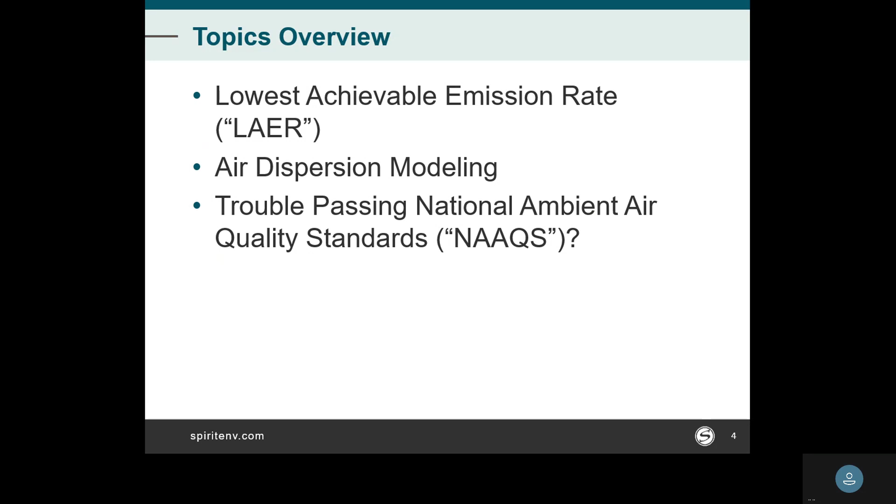I don't know if you've heard about it, but the EPA is actually right now doing what they call reconsiderations of the NAAQS. They're reevaluating the PM NAAQS, primarily PM 2.5, and they're reevaluating the ozone NAAQS. Both of those levels may drop sometime in the future. Matter of fact, the PM probably will drop -- it's just a matter of how much. So passing NAAQS can be a very important and critical item.

So the purpose for today -- this is an intermediate level course, and we're going to presume that you have kind of a base working knowledge of what some of the concepts and terms are. We may go into some of them again, just as a reminder. I don't know how often some of y'all in the audience work in this world.

Michelle and myself, we pretty much live in it full time. But what we do -- the way I used to describe it, and the way I still describe it to some of our new engineers and younger ones at Spirit -- is that what we do is a perishable asset. And you've probably found that out yourselves in your career. If you're working with something and you step away from it for a few months and try to get back into it, something has probably changed.

What we're going to try to do is help reinforce some of those concepts, bring you up to date on where things are, and maybe even add some new concepts you may not have run into in the past. Ultimately, our goal with the class here today is to provide a better understanding of air permitting and how some of this stuff works. Okay, sound good?

All right, so let's go into modified versus affected. This is one of the first things somebody has to determine when looking at a project, or when somebody says, hey, I want to do something to a permit or a piece of equipment out there. Are we modifying it or are we affecting it? It does make a difference in how regulatory agencies receive the project and carries the conversation when you're moving forward.

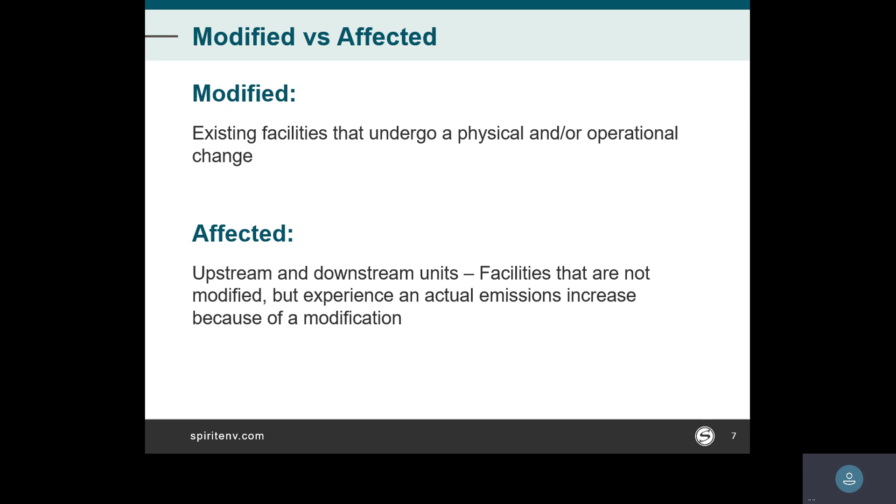Modified is for existing facilities that undergo a physical or operational change. Now, a new piece of equipment is a new piece of equipment, right? But when you've got something out there that's existing, when do you modify it, and what is a modification? Likewise, affected is an upstream or downstream unit that is not modified, but has an actual increase in emissions because of something that happened somewhere else. We're going to go into both of these categories in more detail.

So let's start with modifications, physical and operational changes first. A physical change is the actual construction of a facility or something physical to an existing facility. The way I describe it is you're actually putting your hands on a piece of equipment. You're doing something. You're actually physically changing part of the structure or part of how it was originally built.

The EPA, when they came up with this definition for federal major NSR rules, the definition according to the EPA and many state programs could potentially include renovation work that extends the life of the facility or the life of the project. It's borne out in a number of things. If you think about NSPS and NESHAPs, they have levels in there where if you do changes to a piece of equipment that exceed a certain cost, they're going to treat that piece of equipment either as a new piece of equipment, or it will now become subject to the rule where it may not have been before.

You'll also see it parallel into state environmental agencies. For example, at the TCEQ, a lot of people don't know this, but if you're coming in with a piece of equipment and I'm going to use the word modifying, I know it's a kind of dangerous term, but if you're doing something to it to the point where you exceed 50% of its replacement value, the TCEQ is going to consider you to be building a new one. That's just because you've restructured what was there so much that it's like building a new piece of equipment. The EPA and many state programs actually take that into account, or they try to.

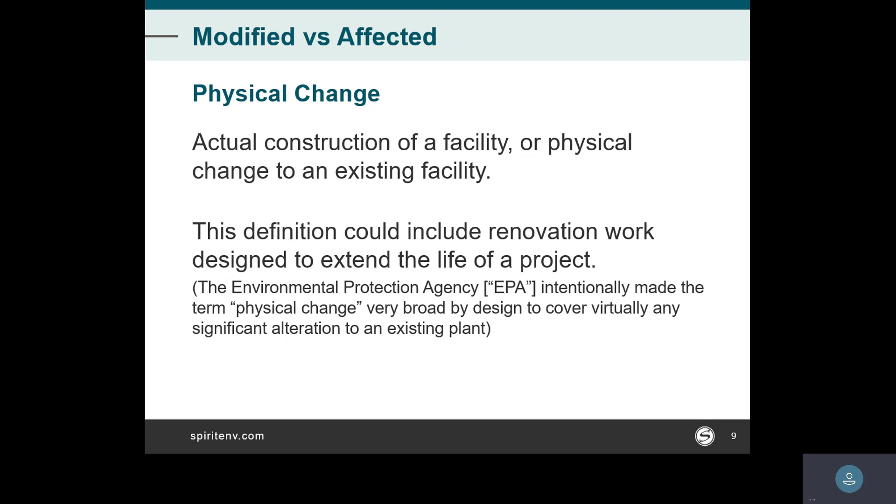So operational change is where it starts to get more interesting, I think, is what does that really mean? When the EPA came up with the concept of operational change for major NSR, PSD, and non-attainment, they intentionally made that concept very broad because I think they were trying to encompass as many things as they possibly could and pull them into the permitting program.

So it is a broadly used term, and it's really designed where you change the method of operation of an existing piece of equipment versus how it was originally represented or authorized. That's a pretty big difference: okay, you've got a piece of equipment. What did we originally tell the regulatory agency, whether it be the TCEQ or whatever state you're in or the EPA, what did we tell them we were going to build? What kind of parameters did we put on that?

And then if you want to do an operational change that goes outside of that box, the EPA is going to consider that a modification, even though you haven't physically touched or laid hands on the piece of equipment. Part of the reason is that a lot of those other restrictions that go into a permit go into other things besides just the pure authorization and the technicals of what you're trying to do. It also goes into public protectiveness.

If you have to do modeling, that goes into it—modeling for NAAQS compliance. And many states, including Texas, have an air toxics program. So all of these things cascade and build on each other.

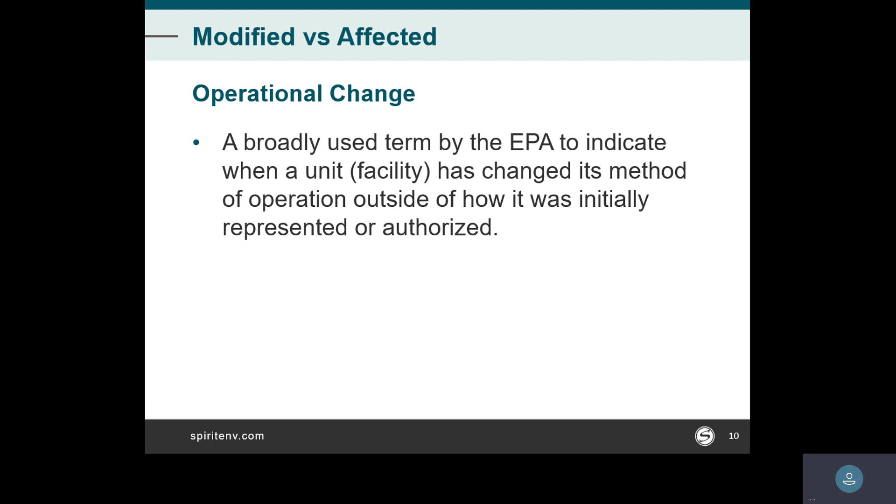Going back and figuring out whether we're doing an operational change to a piece of equipment can be very important. I've seen a lot of crazy conversations occur on whether something was modified or not, and a lot of times it gets back to operational change.

An operational change can encompass a number of different things. It can result in an actual emissions increase, or a change in character of emissions.

For example, if you're changing materials in a storage tank—going from product A to product B—and the tank was never authorized for product B, even though you don't need to physically change the tank, that would be an operational change and therefore a modification. That gets back into control technology, vapor pressure, and molecular weight of the new material you're putting in.

Ultimately, the agencies exist to protect the public. So they'll also potentially look at an NAAQS type analysis and off-property impacts for health effects.

Another thing is that when you make representations, a lot of them involve things like firing rates, charge rates, and throughput limits. All of those become conditions around which an air permit is issued. So if you exceed any of those representations, that's also considered an operational change, which would be a modification, because you're doing something different than the equipment was ever identified or authorized to do.

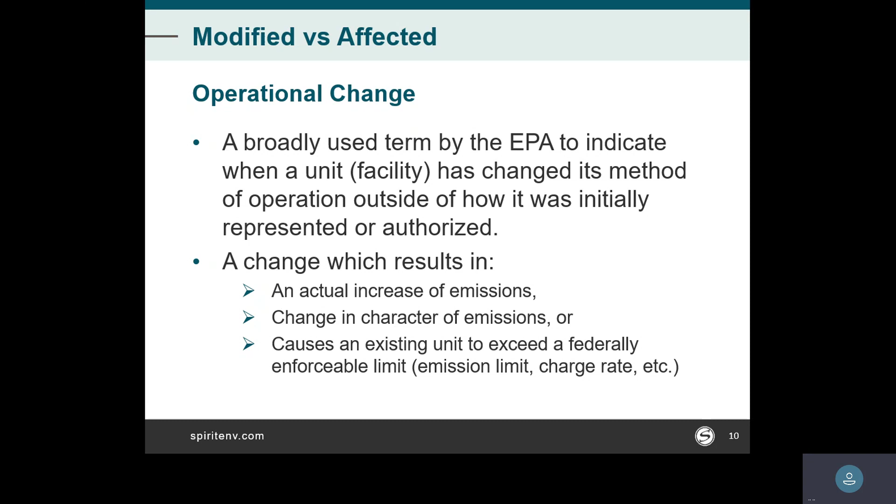Operational change encompasses so much that the EPA actually decided to take the reverse course and tell you what an operational change is not. How about that? It's easier to say what it isn't instead of what it is.

Some of these rule citations I have for you here are out of the EPA rules. You'll see two different cites: 51-165, 51-166, which I have here, and 52-21. For those that don't totally nerd out on environmental regulations, there is a difference, and it's in the fine tuning of the rules. 51-166 is the EPA's PSD rule.

That applies to states, what are called SIP-approved states. A SIP-approved state has full authority to carry out the environmental program for the EPA. Those are the states that actually issue the permits under their own stead, and the EPA is basically a third-party observer.

52-21 is a very similar rule, but it's for what they call delegated states. A delegated state does most of the work, but it's actually the EPA that's issuing the permit or approving the actions. So it's about whose authority the activity is occurring under—that's the difference between an approved state and a delegated state.

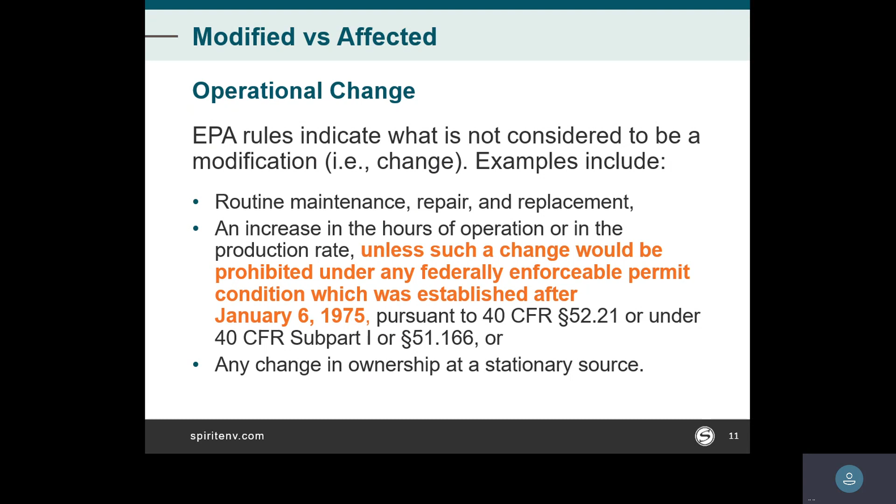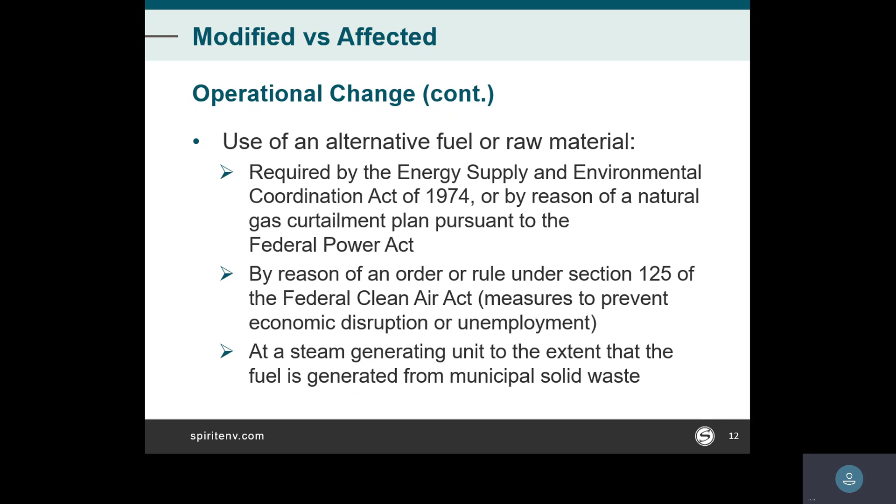I've got some other things in here that I put in just to be inclusive in the slide deck. But most of these other exemptions from the definition of modification actually go back to the late 70s and early 80s. Back then there was a big embargo on the United States for fuels and petroleum fuels, and the EPA and federal government reacted to that. There was a time you couldn't get natural gas to fire gas plants, or couldn't find the kind of fuel oil you needed. There were fuel shortages all over the place, and the federal government recognized that. So that's why you'll see things like a natural gas curtailment plan, to prevent disruption to the American economic system and to the making of fuels and gases that we all use. That's what a lot of these other exemptions were for, so like I said, I put those in there just to be inclusive.

Changes that require authorization: if you have a production increase that requires a physical change, that's a modification. We already talked a little about operational change, and I've got some more examples here. If you exceed a federally enforceable emission limit, basically a permit condition or representation you made in a permit, things like emission rates, firing rates, throughput limitations, charge rates, those all become conditions and requirements around which an air permit was issued. So if you go outside of that box of what you represented, that's an operational change and therefore a modification.

I can't tell you how many times over my career, both with the regulatory agency and now at Spirit, the question comes up: well, we're not doing that much, we represented a 100 ppm exit concentration and we're only going up to 125, what's the big deal? Well, the big deal is you told everybody it was going to be 100, and once you go above and beyond that, that's an operational change by definition. So it's those kinds of concepts that sometimes get embroiled on your desk when you're going back and asking, have I modified something or not?

So just a helpful hint: is it different than what you originally said it was going to be? That's huge in the environmental world. The EPA actually has a slang term for that - they call it a relaxation of a federal requirement, a federally enforceable requirement. That's the way they look at it.

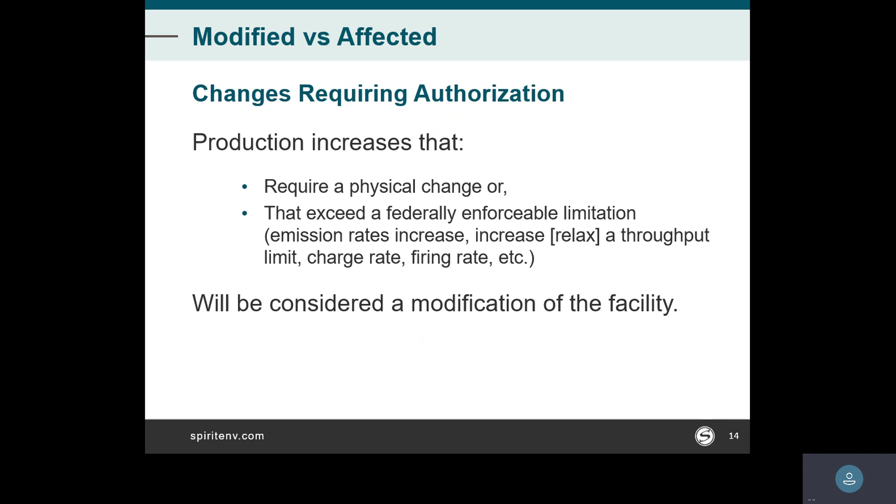The maximum allowable emission rate table - almost always, if you have a change that causes you to exceed that, either a pound an hour or a ton per year, it's going to be considered a modification. Almost always. There is an exception, and it's going to be an unfair one, but we've seen it a lot: the EPA gives themselves a lot of deference and treats themselves differently than everybody else sometimes. If you haven't encountered that yet in your career, you probably will eventually.

An example of that happened just a couple of years ago: if the EPA changes a calculation methodology - AP42 storage tank calculations is a big one, they had a total revamp of AP42 a while back - and you go back and look at those new calculations, depending on the physical requirements and materials you're using, sometimes you'll calculate an emissions increase, sometimes a decrease. It's kind of a mixed bag. But if you have something with an emissions increase that causes you to increase emissions on the maximum allowable table, if it's because the EPA changed a factor, they won't necessarily call that a modification.

Now, they may go back and make you remodel to prove that the higher emission rate isn't going to impact somebody off property. So there may be a modeling component to it, but they won't make you go through a full BACT analysis because it came from them. Now what happens if you go back and decide you were off on a factor and need to modify it, and your pounds an hour, your tons a year go up a little differently? If you talk to the EPA and many state programs, if you've increased the pounds an hour on the allowable table, that's a modification all day long. They give themselves deference—they can change their factors, but the other side necessarily can't.

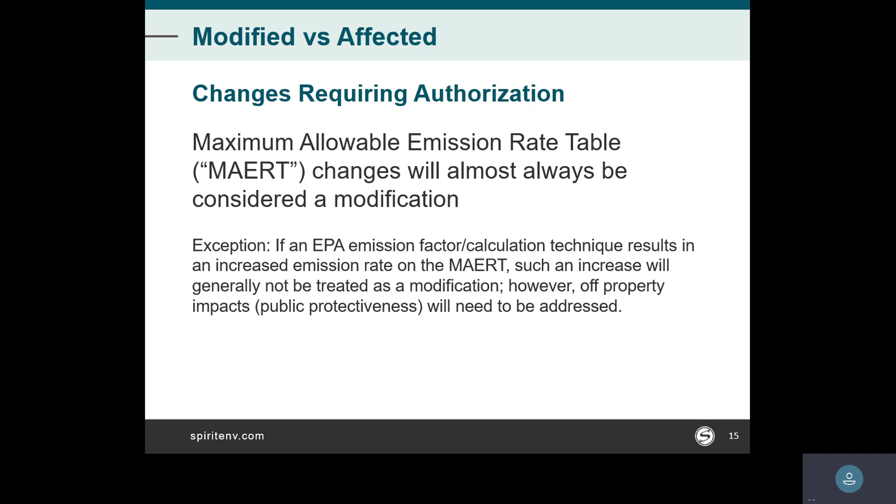Okay, any questions on modification so far? Tracking pretty much with what you've done and what you've heard? Good.

The other category is affected. Sometimes in my career I've noticed people will say modified and affected and cross those terms a lot—'we affected it.' Well, did you modify it? 'Well, it's affected.' Well, what does that mean? Because if you're an environmental person, modification means something different to you than affected does. So sometimes it's just having that conversation that gets kind of interesting.

An affected facility is terminology that the EPA uses—it's primarily an EPA-derived term and concept. Some states may or may not look at affected facilities, depending on what's going on specifically. But basically, an affected unit is an unmodified unit that has an increase in actual emissions because of something happening someplace else. So you haven't modified it, you haven't done a physical change, you're not changing the way it operates. But because of something that happens someplace else, that particular piece of equipment is going to see an emissions increase. That's what they mean by affected units.

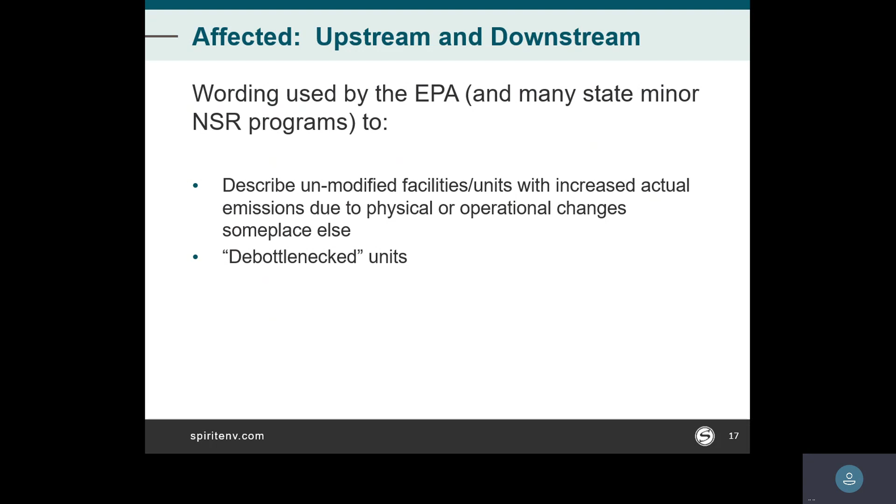The EPA also has a slang term for that—there's a lot of slang words and acronyms in our business, right? They call it 'debottlenecked'—the facility was debottlenecked. So if you heard that, it doesn't necessarily mean it was modified. It could be—sometimes the debottlenecked unit is the unit you're modifying to relax something. But a lot of times it's not. We've got some examples a little later to help point that out.

Debottlenecking is basically removing a constraint somewhere in the system that keeps it from operating up to what you originally thought it would operate, how it was supposed to operate. A lot of you know that when you design and build a piece of equipment, it would be nice if once you actually put it on the ground it could do what it was advertised to do, right? How many of you have run into that before?

A lot of times you think something is going to operate at 1,000 gallons a minute or what have you. You get the equipment out there and now it's actually doing 900 or 870. Well, if you do a change to increase it up to that 1,000, believe it or not, that's considered a modification, especially if you got the equipment built and it's already on the ground, because now you've done a physical change to it. And if that piece of equipment now can send more to intermediate processing, more to storage tanks that those vessels have never seen before, that increase in emissions is the affected piece, because the environment is actually seeing an emissions increase.

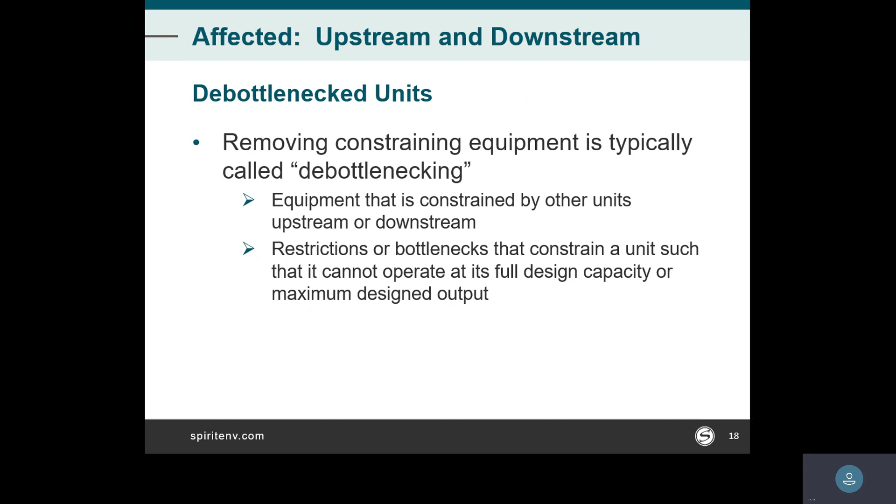So, kind of a summary of what we were just talking about: sources upstream and downstream that primarily experience an actual increase in emissions are considered to be debottlenecked and affected.

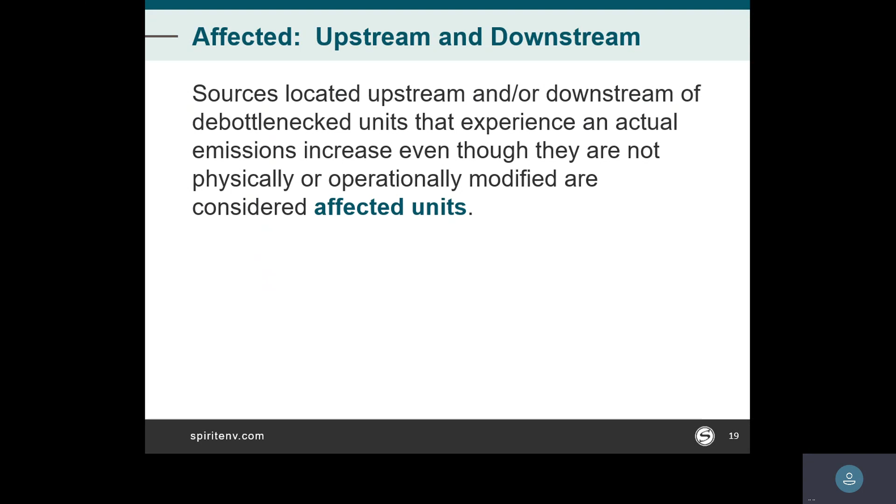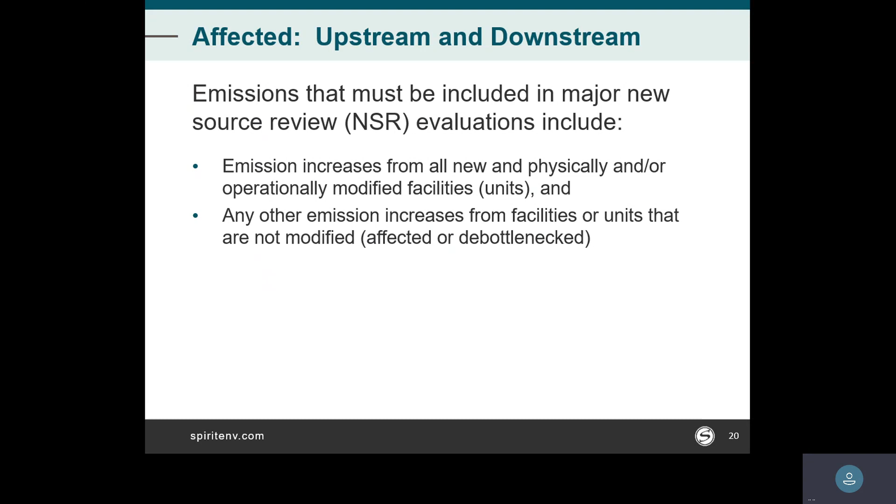Here's why that's important. When you do a major NSR review, meaning prevention of significant deterioration, what a lot of people call PSD, or non-attainment review, you're figuring out if a project triggers netting, and then if the net is significant, you're looking at two categories of emissions. They're looking at modified facilities that have an increase - we already talked about that, physical and operational changes. But it also picks up affected emission increases - even though the piece of equipment was not specifically modified, the atmosphere is going to see an actual increase in emissions because of something that happened somewhere else.

So those have to be picked up in major NSR analysis as well. Now, the EPA, rightly or wrongly, they're going to go conservative. They're going to presume that the affected emissions increase is a direct result of that project that happened someplace else, and that those emissions increases need to be captured somehow.

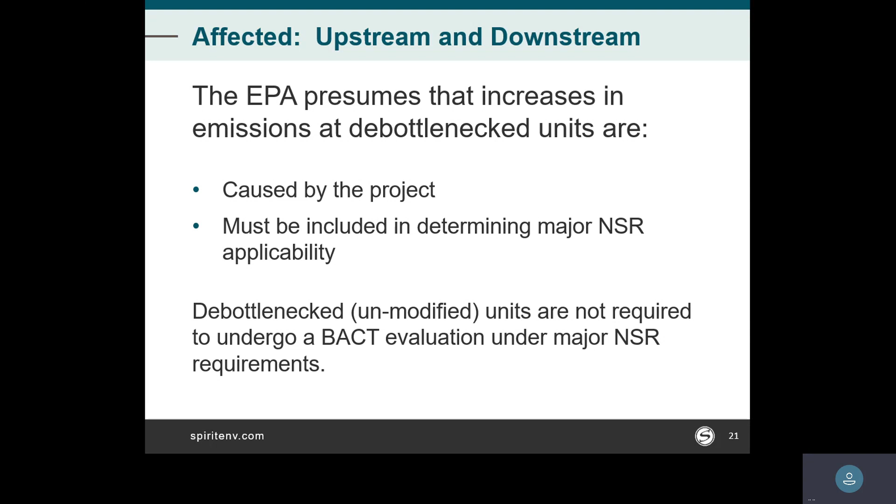That goes into determining whether you trigger PSD or non-attainment or not. Now, keep in mind that a debottlenecked unit is not modified. So the difference between those two categories: if you modify something, a physical or operational change, it has to go through BACT - the entire review process of how it works. An affected unit does not. It's not modified, so it doesn't legally and technically trigger the requirement that it has to go through a BACT review. But those emissions increases do need to get captured and included in the major NSR applicability. And then if there's any modeling, those emissions increases also need to be included in the modeling analysis. So it's kind of part of the way there - it doesn't need BACT, but all the other criteria still generally apply to an affected piece of equipment.

So modified units always undergo BACT, even if it's the unit you're debottlenecking. We've actually had people come in and say, well, the federal rules say that if I'm affecting something or debottlenecking it, I don't need to have BACT. It's like, well, that's true - unless you're physically modifying the piece of unit that's constraining it, which gets you right back into the BACT loop again. That actually comes up from time to time.

So not only do the emissions increases from affected units need to be included in modeling and in applicability, don't forget there's also the air quality analysis, which may or may not be modeling. States have different ways they can approach that, but it's a public protectiveness analysis - are you protecting the NAAQS, is what a lot of that comes back to. And also, if you're in a state that has increment and you have to do an increment analysis, affected facilities and the emission rates also need to get picked up and put into any increment calculations as well.

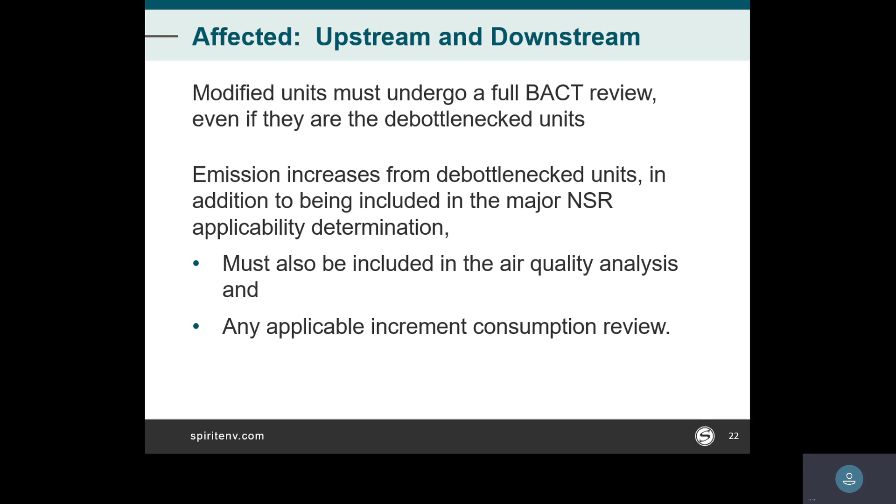Here's the other thing about affected units that makes it confusing: they're treated almost identical to modified units. The way you do an emission increase calculation for an affected unit is the same way you would for a modified unit. It's the baseline actual emission rate for that piece of equipment before the change that debottlenecked it, versus either a projected actual emission rate or a potential to emit after the change. That's how they get that delta, that's how they figure out if that increase has happened or not. And that's the delta that gets put into major applicability and potentially into any health effects or modeling type scenario that would come up after that.

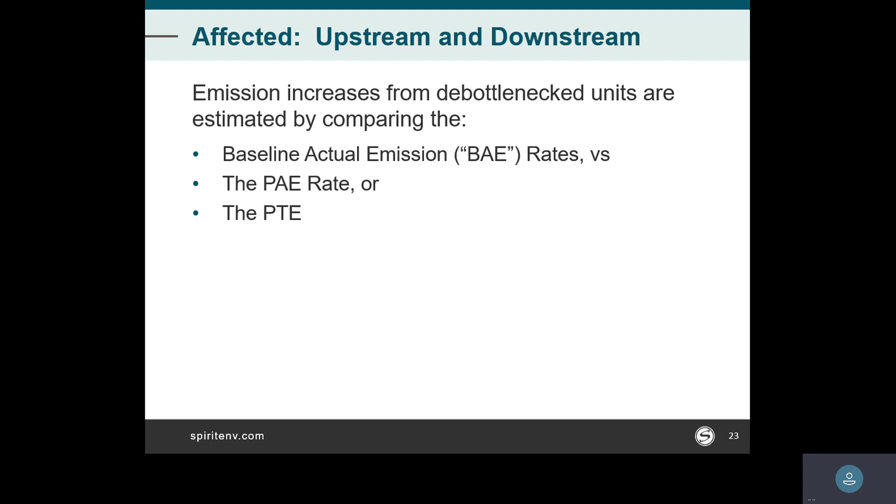All right, clear as mud? Any questions? Doing okay so far? I'm either really doing a good job explaining this or it's still early. I'm going to go with option number two - it's still early.

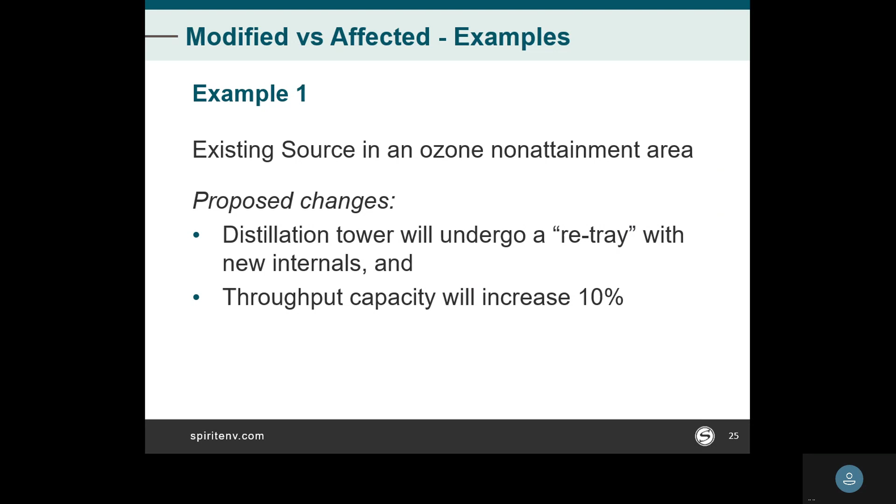All right, modified versus affected examples. In an ozone non-attainment area, a company comes in, they have a distillation tower and they're going to retray it with new internals, and the throughput capacity is going to increase 10%. Is that a modification? Yeah, because you actually made a physical change, so that automatically puts it into the modification category.

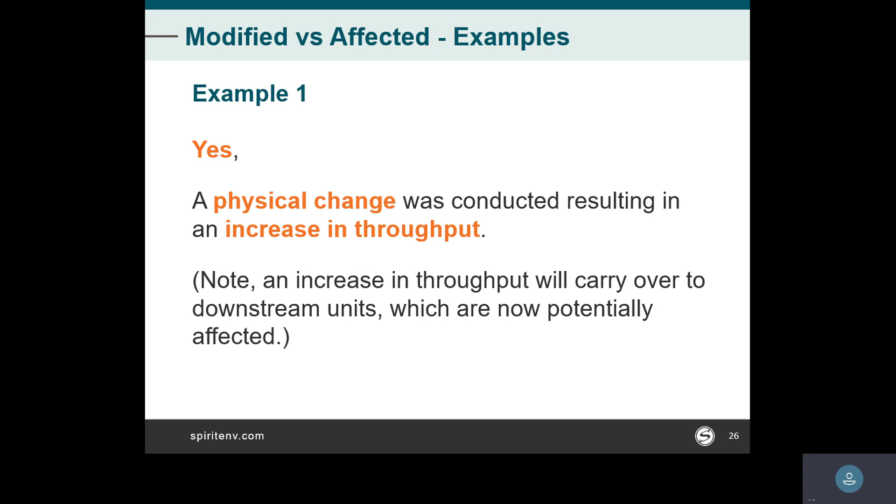But keep in mind that increase in throughput could carry over into other units, so you potentially have that affected component as well. It really depends on what those other units are, how they're piped into the overall system. They may or may not see an actual increase if it's a complex plant, complex design, but it's something that should at least be taken a look at. So if somebody ever asks you, is this affected? Did you do the analysis? You can pass the red face test and say, well, yes it is, or no it isn't, and why.

Example two: a company in an attainment area has an uncontrolled vent stream to the atmosphere, and they're going to install a flare to control that emission rate. So is that a modification? Putting on a control device?

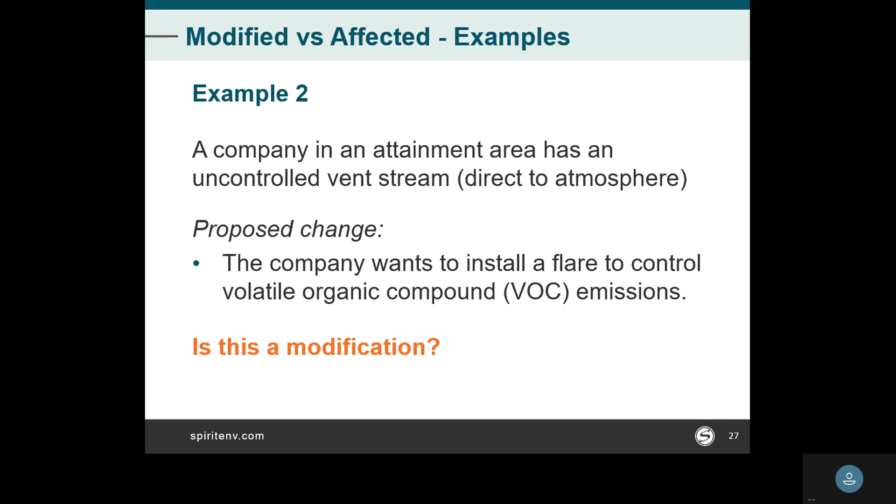And the answer to that one is yes. It's not necessarily a modification to the unit you're controlling because the flare is reducing those VOC emissions. But the flare is a facility itself. It has byproducts of combustion, NOx, CO. If you have any sulfur in your stream, you're going to create SO2. If you have any halogens, you're going to create the inorganic acid of that. So you may form a little bit of HCl or HBr or something like that. You'll get the inorganic byproduct of combustion. So the flare is a control device, but it's also a source of emissions. And so it's automatically something that gets reviewed.

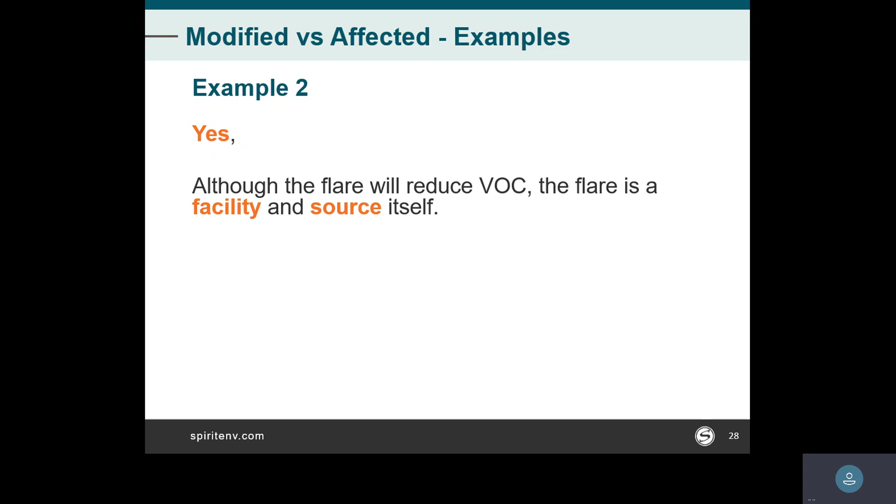And then, yeah, the byproduct of combustion needs to be evaluated for major NSR as well. That's what makes putting on control devices somewhat interesting sometimes, and you kind of get into a catch-22. We've done a number of projects along the ship channel, for example, at marine and barge loading facilities, where somebody will put on an oxidizer to control VOC. The VOC numbers go down by a lot, but now you've got NOx that's created. So you can potentially be trading one issue for another. The agencies are normally going to say we would rather have the VOC controls, but keep in mind that NOx is also an ozone precursor. And so a lot of companies will go back and say, okay, do I want to put in a flare, or do I want to go with an incinerator, a thermal oxidizer, or a regenerative oxidizer, something that helps me reduce that byproduct NOx component. So these different things kind of go into that calculus as well, if you will. But just to let you know, all of these things are interconnected and kind of loop back around.

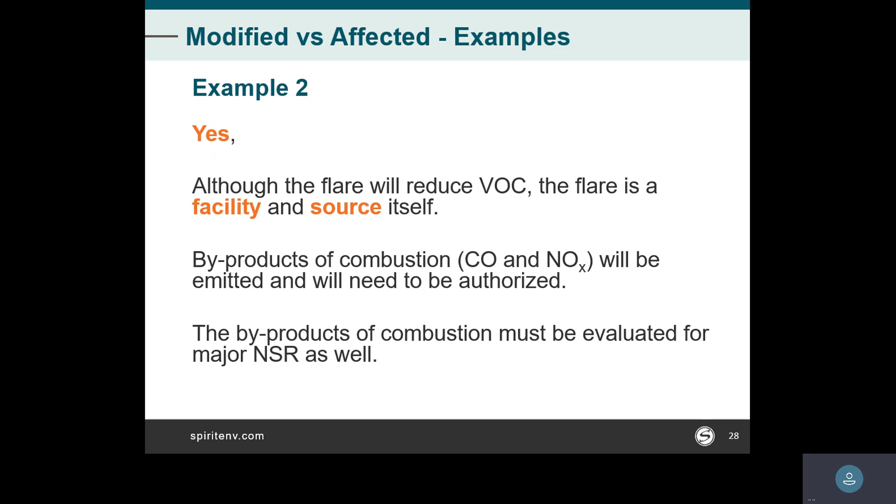You know, the short answer is yes, it would, because you physically changed something. Now, you can go back to a regulatory agency and try to make the argument that it's not because it's constrained someplace else. But what the agencies are worried about is if somebody comes in and does that, and then they do something someplace else and debottleneck that piece of equipment, well, it can now operate at a higher level than it could before you did the change. And they're worried about that follow-on unintended consequence, or maybe it is intended. The regulatory agencies struggle with that of, you know, when you're doing a change to a piece of equipment, what's the ultimate goal for that? And so a lot of times out of the box, they're going to come back and they're going to say, yeah, you've modified it because you made physical changes to it. And then it's just a matter of, can you convince the regulatory agency that there's really nothing to see here because I've got limitations someplace else?

Yeah, you're kind of treading the line of the ugly C word in air permitting, circumvention. So you've got to be really, really careful about those kinds of modifications. Modifier. Right. But the default answer that people will tell you is yes, it's still considered modified. Yes. Uh-huh.

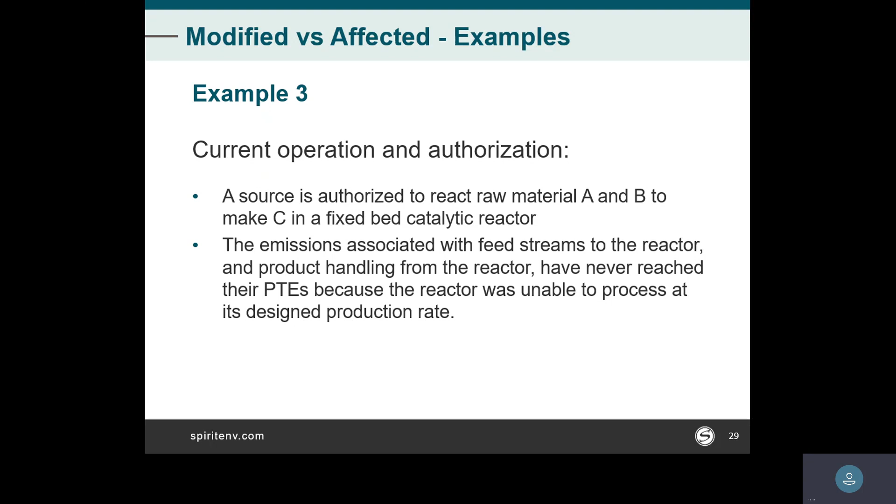But here what the company wants to do is they're going to modify the internals and they're going to change their catalyst to get the yield back up to where it was supposed to be. No other authorization is necessary. Their feed rates, their pumping rates, their product rates going out of the reactor, all of that remains the same. But they do have to go back and they have to change their catalyst, change their catalyst bed to get up to the level that they should have had they built it the way they originally intended to build it.

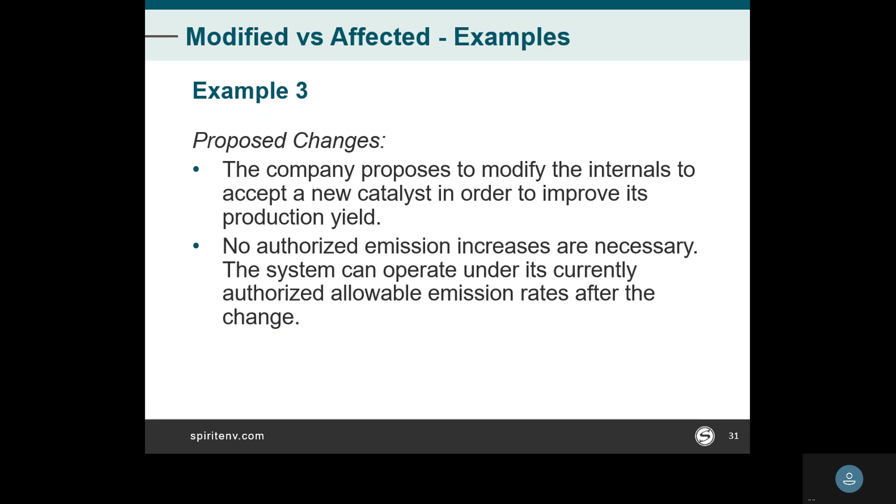So is that a modification? That kind of gets back to what we were talking about earlier. Regulatory agencies are going to say yes, because you have done a physical change. And I've seen agencies do that both when I used to work for one and then now that I'm in the consulting side. I've seen agencies come back and say, if you built something and you didn't build what you told us you were going to build, you built something smaller, the agencies are going to say that's not the regulatory agency's fault.

And especially if that piece of equipment has been out there on the ground for a while, they're going to go back and say, well, it hadn't been an issue for the last 5 or 6 years. Now you may.

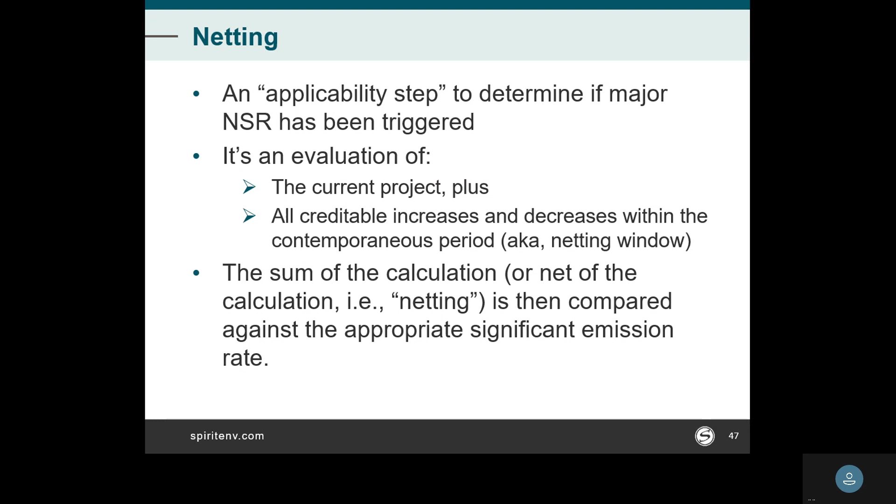So your netting is the sum of the calculation, or your net, and then you compare it against the significant emission rate for the pollutant or pollutants for your project. It is done on a pollutant by pollutant basis, so you have to take a look at all of the potential pollutants: NOx, CO, VOC. If you are emitting HCl, if you're emitting SO2, PM, all on a case by case and pollutant by pollutant basis.

So you need to make sure that your calculations are top notch. Netting ensures that smaller projects do not add up to be a major modification. That's when she came up and talked to us about the rolling boiler projects at one of her facilities. So this is how you are trying to make sure that you are not treading into circumvention.

For NOx, interesting little kicker here: it is possible to trigger netting for NOx for both PSD and non-attainment.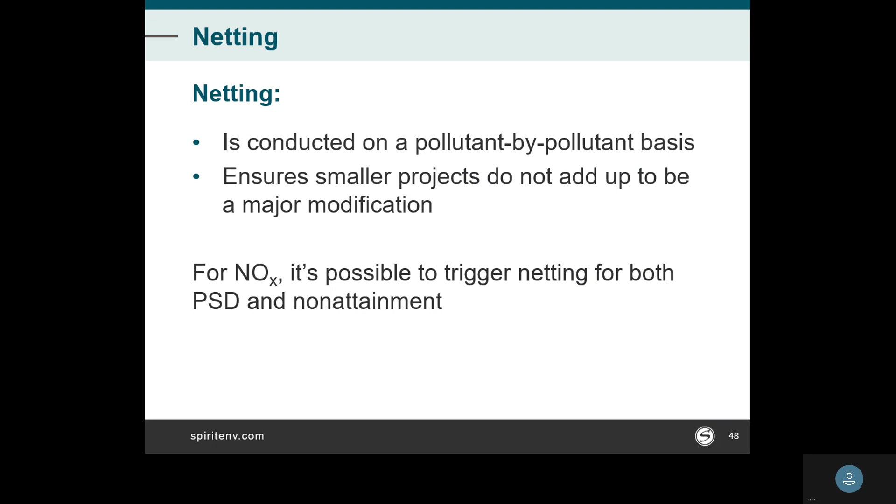So how is netting triggered? If your baseline actual emission rate of new or modified equipment compared to your planned emission rates are greater than the netting significance level for that pollutant or set of pollutants, netting is required. So that's where we start.

And then step 2 is your actual netting calculation. As of December 24th, 2020, EPA says that your project's emissions increases and decreases can be included in step 1. That's under project emission accounting. We'll get into this a little bit more in some of the examples.

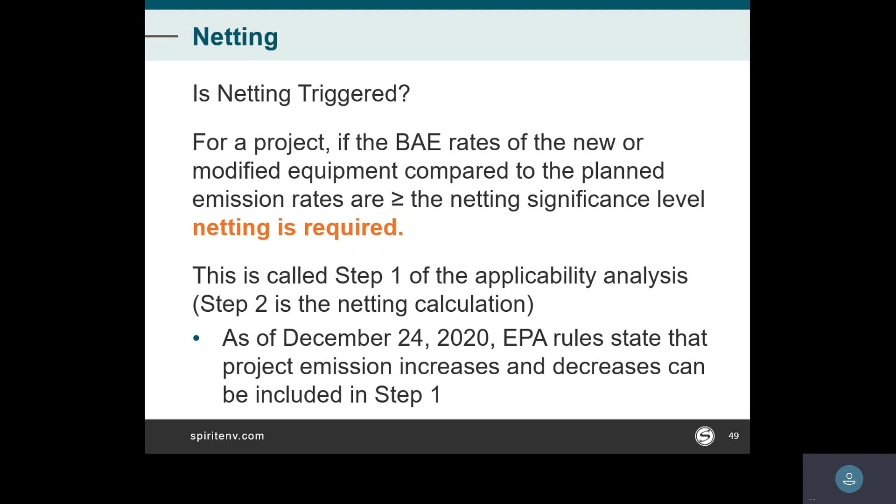It's not that uncommon as you're taking a look at a project at your facility where you might be doing some debottlenecking in one area, but as part of that, you might either be taking some other older equipment offline or making some other possible changes where you might have some affected equipment, perhaps ratcheting down boiler rates if you're adding in a control device that does heat recovery. So you might not need some of those other sources as much. You can include those emission savings, if you will, as part of your project. And that can make or break some projects from becoming major NSR or PSD.

So your baseline actual emission rate: emissions in tons per year actually emitted during a consecutive 24-month period within either the previous 10 years, which is pretty much everybody in here, or the previous 5 years for electric utilities. It has to be a consecutive 24-month period. You can pick any 24-month period that you want within that 10 years, and it doesn't have to start January to December. You could pick July from 2019 to June of 2021 for your emissions rate period.

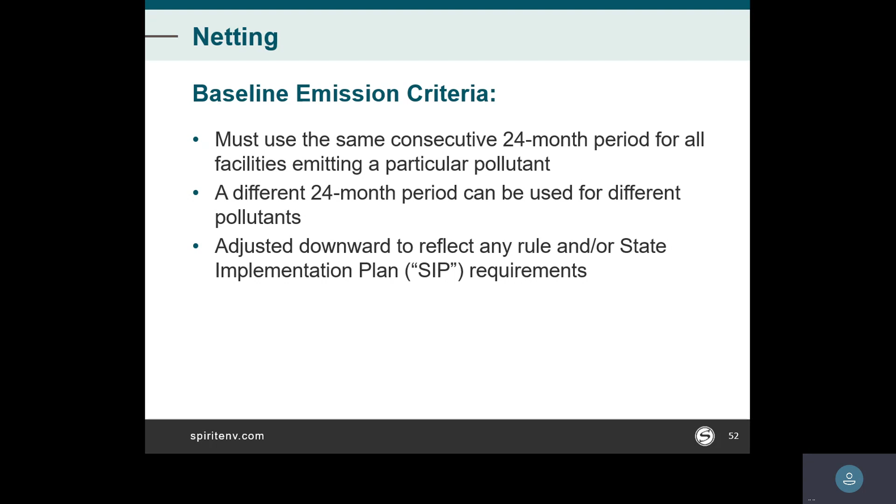Your baseline emissions might be adjusted downward to reflect any SIP requirements. This really comes into play the most in the Houston-Galveston area, severe and slash serious, all depending on which year it is, and the SIP requirements that are in play. Most other areas of the state are doing okay, except San Antonio and Dallas-Fort Worth are having some issues, but definitely for VOC, the San Antonio area is in the crosshairs right now.

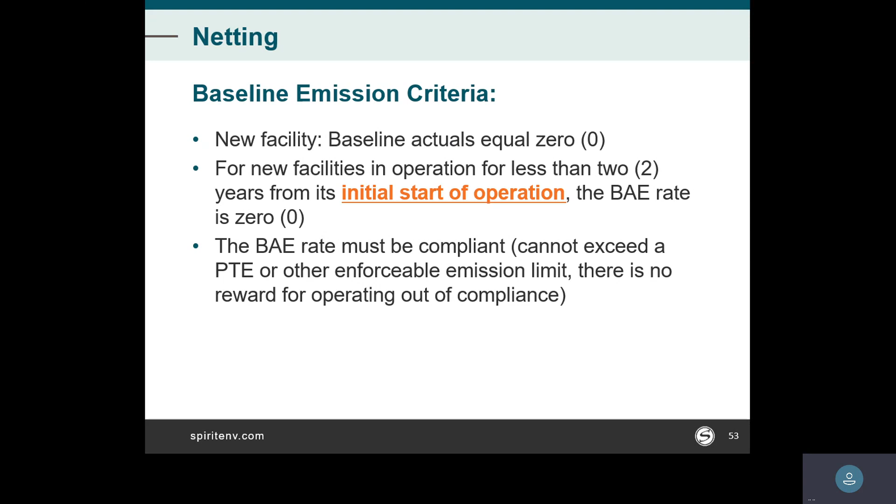So for a new facility, like Johnny mentioned earlier, your baseline actuals are 0. For facilities that have been operating less than 2 years from their initial start of operation, your baseline is still 0. And your baseline must be compliant, so you can't exceed a PTE or other enforceable emission limit. We're looking at comparing to your PTE or PAE, all depending on what's available to you.

Netting, it doesn't sting as much as it used to. About 20, 30 years ago, before PAE really became a thing, it was really, really popular for facilities to permit out the highest emission rates that they possibly could, saying, you know, if we run flat out 8760 hours, this is what we can do. And that has been reeled back in between the netting process and SIP requirements. So PTE and PAE are usually a lot closer now than they used to be.

It used to be we'd see facilities like surface coating facilities that would try and permit usually 70 or 80 tons per year uncontrolled or partially controlled emissions, and their BAEs were usually more along the lines of 40 or 50 tons. And they were always big losers when it came to netting, because they were definitely running nowhere near their PTE. There was a time when having a high PTE may have been a benefit years ago, but in today's day and age, it's almost more of a liability, because every time you do a physical or operational change and trigger this analysis, you're going to be doing your baseline to PTE comparison. So a lot of those companies are using projected actuals anyway.

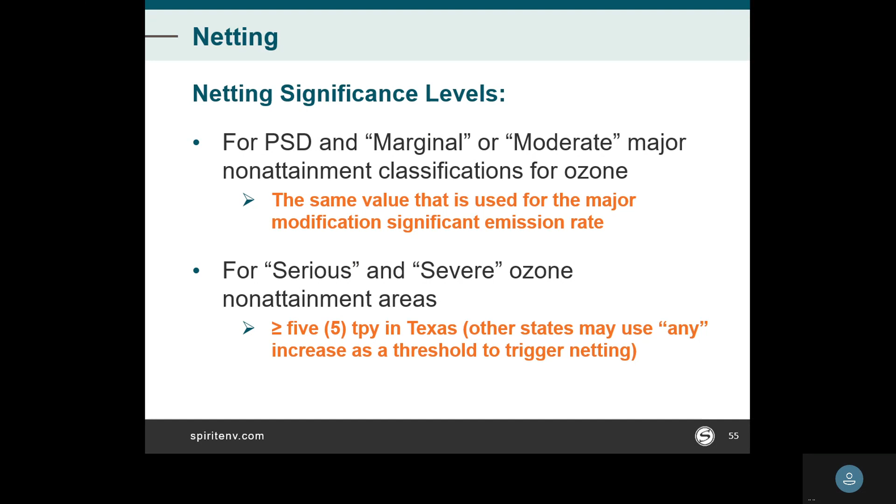Okay, your netting window - we're looking at 5 years from the start of construction out to the proposed start of operation. So we're going back from your proposed start of construction back 5 years. This is where we need to be really certain, especially now with logistics issues, material shortage issues, things like that. A lot of you are painfully aware that construction schedules are almost double what they used to be. So you want to be mindful in taking that into account - that can skew your netting window a little bit.

And when you do your netting calculations, the TCEQ uses a form, and on that form it'll ask you what your estimated start of construction and start of operation is. Sometimes you'll see the agency use your application submittal as the start of construction, and that really depends on the kind of project you're doing. Sometimes it may take you 2 or 3 years to build something; other times you can go in and change something out in 2 weeks and start operating.

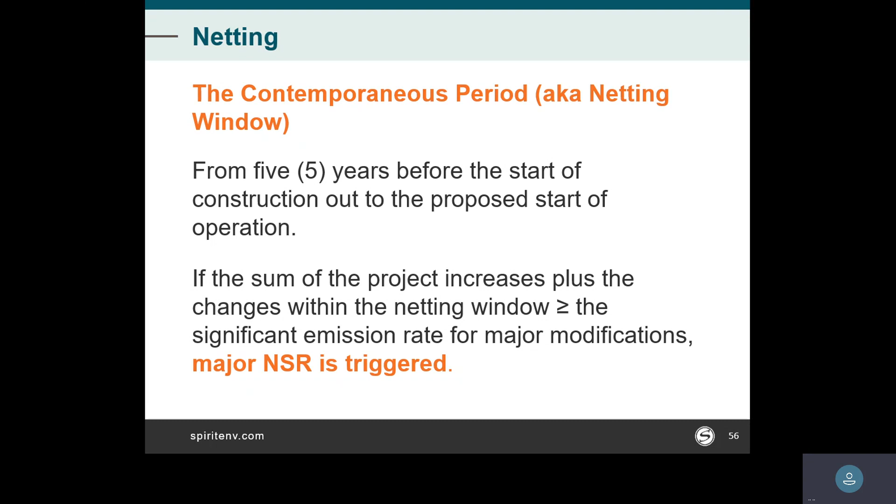So if your increases and changes in the netting window are greater than the significant emission rate for major modifications, you trigger a major NSR. And we'll talk about BACT and modeling and all the good stuff that goes along with that.

And that concept is always a source of confusion, and what I term regulatory tension - how's that for a good governmental phrase? Regulatory tension. So what the EPA, when they did this in their NSR reform rule, said: for the current project, you can project forward, but once that project becomes in the past, once you look back, the EPA argued when they wrote their rule that projections no longer matter. You know what you're doing - you don't have to project anymore. That's a historical value, and they expect companies to go back and capture that.

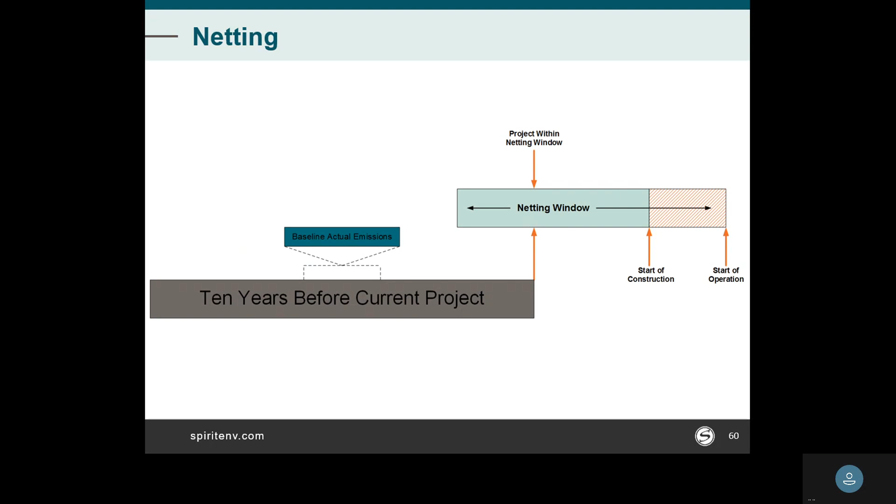Once you have your netting results, what are you going to do with them? You take a look at the significant emission rate. Is it 100 tons? Is it 40 tons? Is it 25 tons? Is it 10 tons? Is it 5 tons? This would be on a pollutant by pollutant basis. And if your netting value equals or exceeds the significant emission rate, you're triggering major NSR.

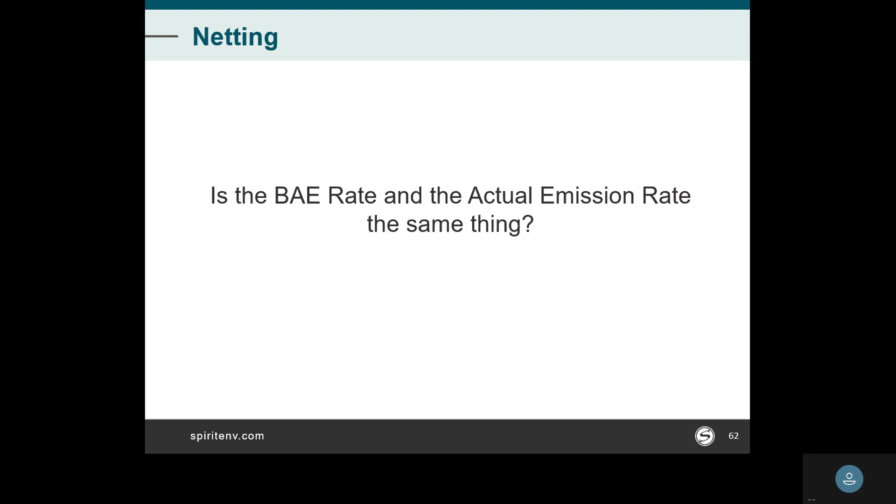Okay, common question. Is your baseline actual emission rate and your actual emission rate the same thing? Thoughts? Who says no? Man is correct. They are not the same.

Your baseline actual emission rate is your highest consecutive 24-month period out of the last 10 years. Your actual is the 24-month period immediately before your change. So keep that in mind. That's why using that BAE rate is extremely important. It gives you credit for a lot of potential operational changes. And also, as we're very, very poignantly aware, economic situations change a lot. When we have an economic recession, your production goes down. It prevents you from getting penalized for that.

And netting generally is not conducted at minor sources unless you happen to be in one of those fun states like New Jersey or California, where essentially any change would trigger netting. And new major sources, basically you're in.

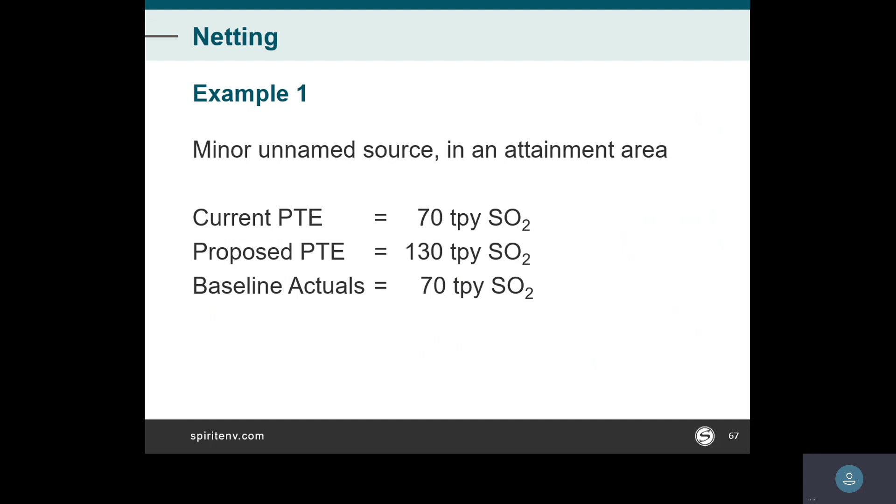Yeah, I know it's a little early for math, isn't it? 130 tons minus 70 tons is 60. The way I've tried to explain this is when you're doing this kind of evaluation, take where you are, your baseline emission, and where you want to be, which is your new projected. It's that delta, and that's the difference. So the project is a minor source and it's not a major source in and of itself. You don't trigger major NSR, but all depending on what state you're in, if they have minor NSR requirements, those might apply.

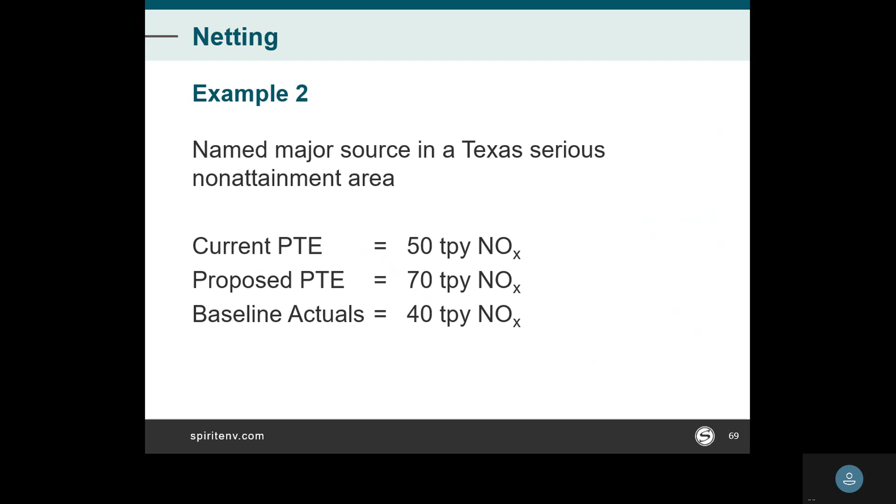So keep your head on a swivel for that. Okay, Texas specific: named major source in a Texas serious non-attainment area. Current PTE is 50 tons per year of NOx. Proposed PTE is 70. Baseline actuals is 40. We're looking at 30 - you're looking at that 70 minus 40 to get 30. The significance level is 5 tons per year for the serious non-attainment area, and emission increases exceed 5 tons. So yes, you do need to do netting for this one.

So we want to include all the current project emissions and creditable increases and decreases within the contemporaneous window. If you don't have either an authorized permit or a PI7 cert for it, you've got to take the hit for all of the potential increases if you authorize something under permit by rule for Texas.

So for your netting, your current project is a 30 ton per year increase. We had a May 2021 project, 10 tons per year. October 2020, 20 ton per year. And a June 19, 5 tons per year. No decreases. So we're looking at 65 tons per year increase in NOx.

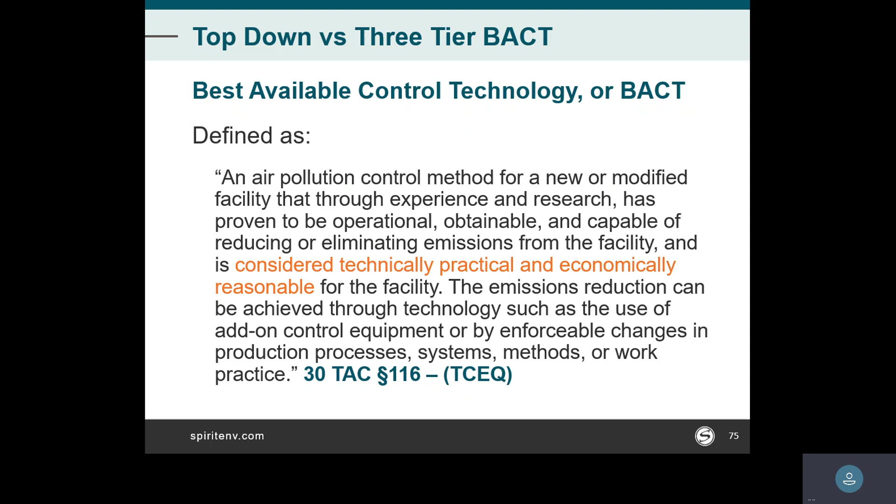But the economically reasonable part, this is really what is the fine line between BACT and MACT. MACT, they're looking for controlling air toxics. The economically reasonable definitely takes a backseat to that because they want as much reduction of those pollutants as they can.

I guess the question is, how much insomnia do you have?

There are lists and white papers that indicate what typical BACT is for any process under the sun. The RACT/BACT/LAER clearinghouse operated by the EPA is an actual database that will tell you, by process and by state, everything that's been entered into the database. I want to say it's probably lagging about 6 months or so, depending on what's been actually authorized by permit. But ideally, in a perfect world, when a state issues a permit for a major source, they're supposed to input that information in the EPA database.

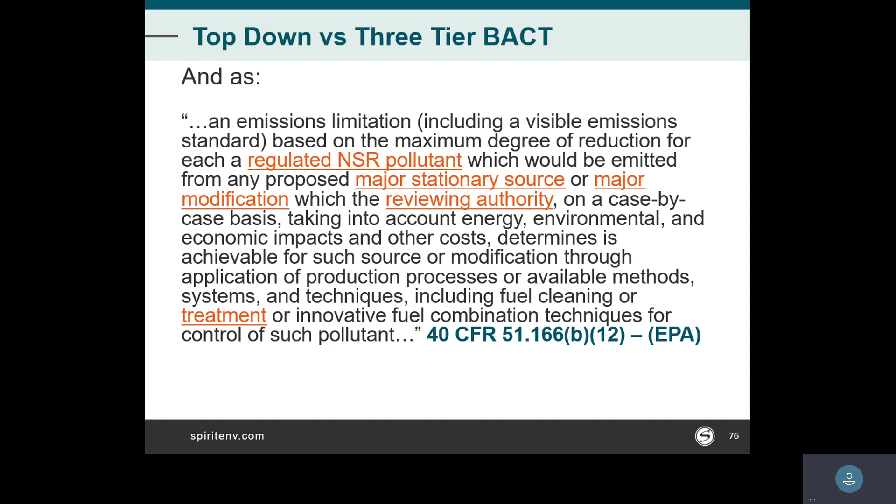That's the great thing about the RACT/BACT clearinghouse - if you're looking for controls for SO2, or controls for ammonia, you can search by those pollutants as well. So if you like going down rabbit holes, we got you covered.

As you might imagine, BACT does not stand still. As technology improves and processes improve over time, I guarantee your chemical and refining manufacturing processes have not stayed the way they were 20 or 30 years ago. The BACT your facility might have been subject to 10 years ago during your last air permit renewal might not be the same if you go to make an amendment.

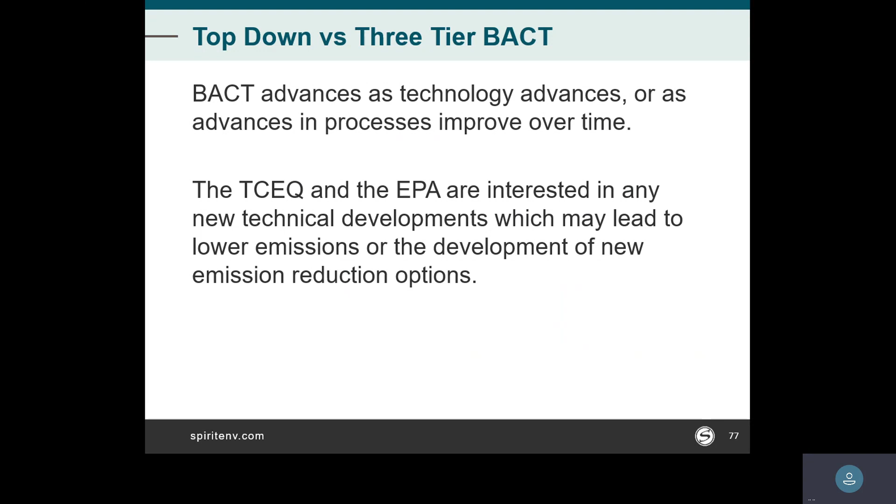So definitely be mindful of that. But as always, the EPA and TCEQ are definitely interested in new technologies that lead to lower emissions or can be utilized elsewhere. They'll give you every benefit of the doubt if you're looking at applying newer technologies and trying to get that in as BACT or MACT.

Texas uses a 3-tiered approach. For tier 1, your controls - whether equipment, operational, or administrative - get compared to emission reduction performance levels accepted in BACT for recent NSR permit reviews for the same process and industry. So you're only compared with your peers. They're not going to compare a resin manufacturing category with a major surface coater or a coal-fired power plant, something like that.

For tier 2, if BACT has not been established under tier 1, they'll compare your controls for similar emission streams in a different process or industry type. So say you're looking at ammonia control for a scrubber, and the particular process you're using is different than any other chemical manufacturer in Texas - they might say, okay, let's take a look at electric generating units that are controlling ammonia for SCR turbines and see where you fall there.

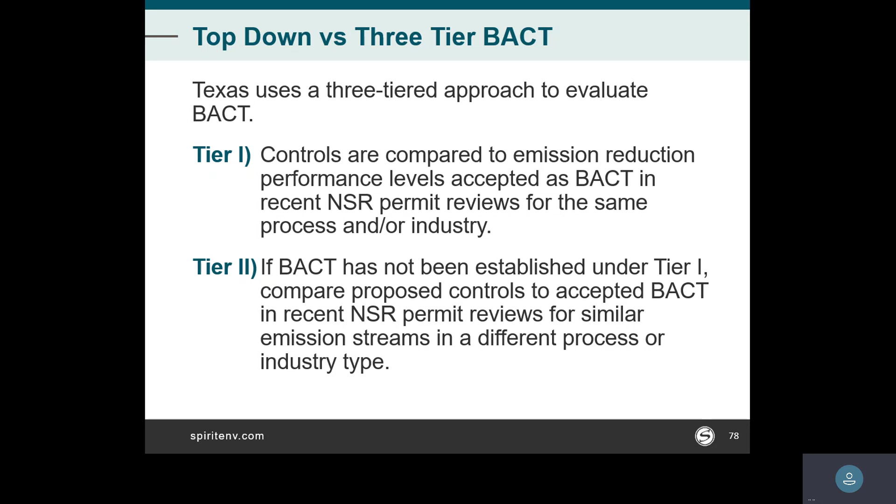And then tier 3, the final tier for Texas, is the economic evaluation. You only get to tier 3 if you exhaust tiers 1 and 2, and this is extremely rare - usually within the first 2, either comparison with your peers or comparison with similar industries, will do the trick.

EPA, so everywhere else but Texas uses the top-down approach. And it's actually a 5-step process.

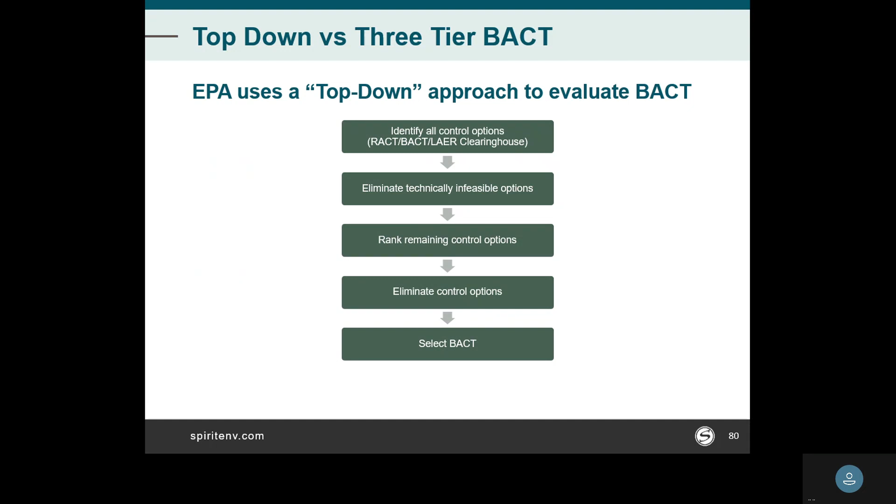If you have a really, really good relationship with your permit reviewer at the agency, be it TCEQ or another state, they will often either give you a copy of a permit or tell you who's done a process and say, go look at their permit and tell you where to find it.

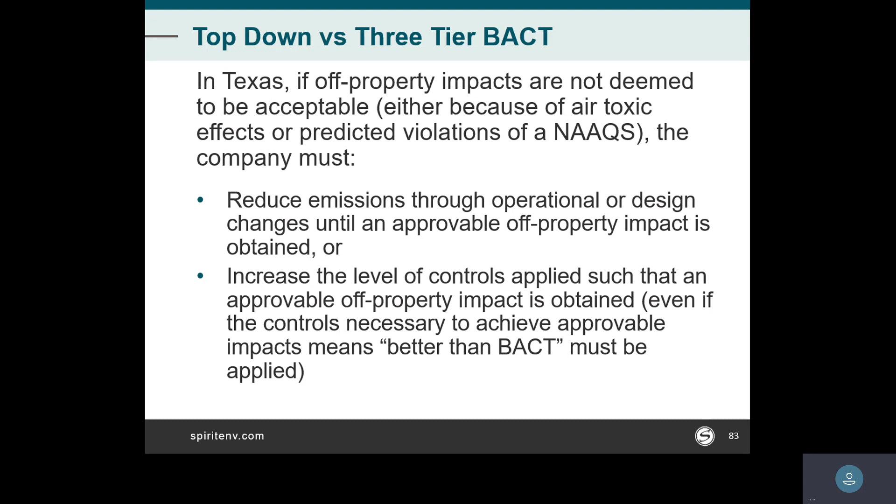They're kind of trying to get the TCEQ to migrate their approach more towards the top down, since we're the last holdout.

With greenhouse gas emissions, obviously control technologies that are trying to reduce greenhouse gas emissions are preferred. A lot of the combustion type control technologies that were great for VOC reduction 10 years ago, but do a lot of combustion byproduct emissions, are not looked at quite so favorably. And again, that's one of those things where you take a look in the RACT/BACT Clearinghouse to see what else is going on, or start looking at innovative technologies.

I had the dubious honor of helping to permit the second biofiltration emission control unit in Texas at a rail car cleaning facility up in the Amarillo area. Unfortunately, that one did not last, because while the biofiltration control system, which is basically like a very technologically complex compost pile that had trays of bacteria that absolutely love to eat VOCs like vinyl chloride, it does require heat and steam to keep those bacteria thriving and happy.

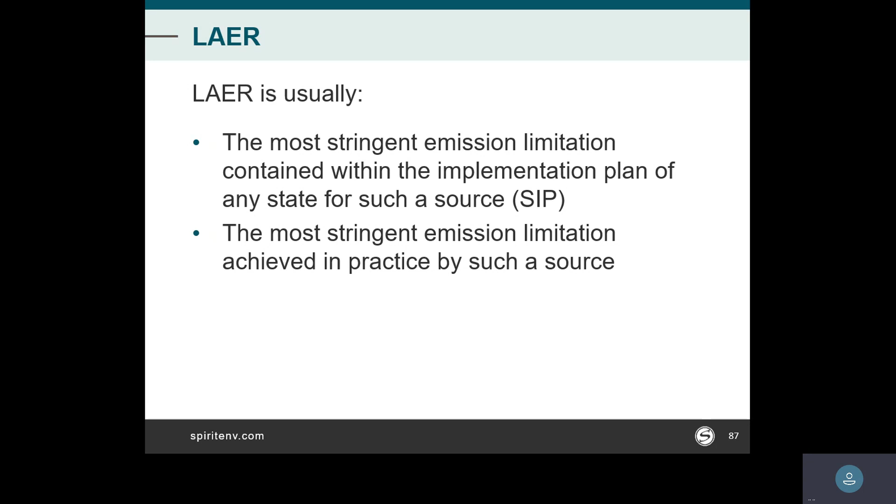So it's the most stringent of anything that you see in a SIP. Unless a more stringent control has been achieved in practice, or a limitation is determined to be unachievable. So if it doesn't make sense, if it technically can't be put on and work, it should be discounted. And it's almost embarrassing that they had to go that far and put that in there, but people are people and strange things happen sometimes. So they did try to discount that.

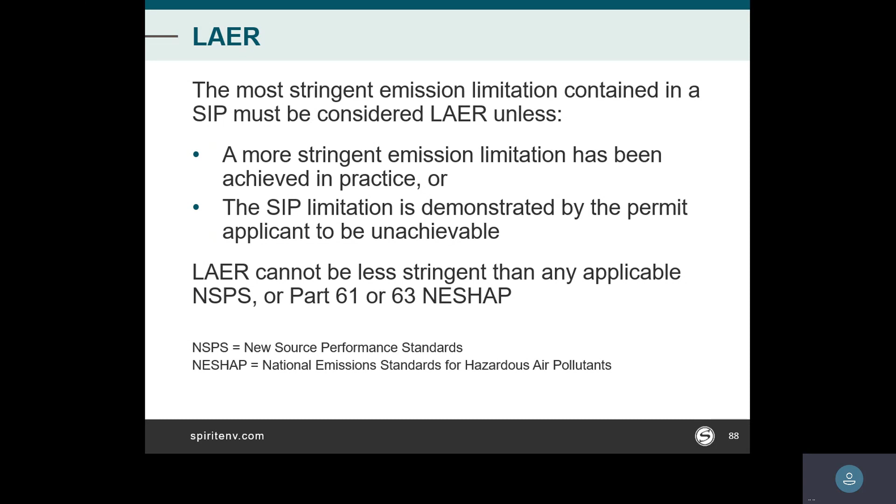For sure, LAER can be no less stringent than what's in any applicable NSPS, Part 61 NESHAPs, or Part 63 NESHAPs, otherwise known as the MACT standards. So it's not lowest achievable if it doesn't even rise up to what the rules say you have to do. That's kind of a catch-all that they put into it.

LAER does take technical feasibility into account, it has to work. But the difference here is there is no economic reasonableness component with LAER. Unlike BACT, if BACT hadn't been established in an earlier project or earlier tier, you might be able to cost out of it and say this is not economically viable for the kind of facility I want to use. In LAER, it doesn't work that way, because you're trying to expand in an area that's already out of compliance with the standard. So there's no economic limitation.

So basically what it defaults down to is, if you have a certain type of facility or operation and somebody, anyplace in the country, has controlled it, that sets the floor. That's what you have to do.

And so usually it's a specific control limit. It doesn't always have to be.

LAER does include fugitive emissions. And what I mean by fugitive emissions is pumps, valves, flanges, piping, stuff like that. There's actually an LAER program, LDAR, leak detection and repair program, that is the most stringent of the stringent, outside of welding everything solid. And so it's onerous by design.

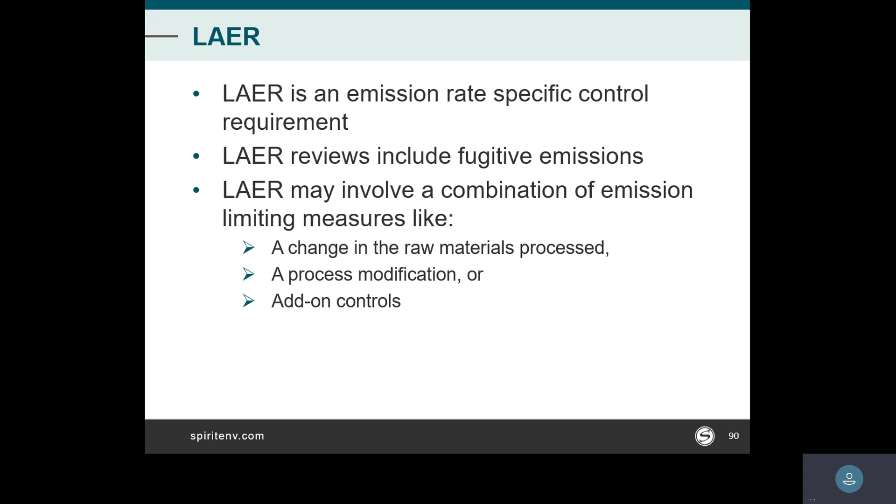I remember one time I was working with a facility, and this has been a few years ago, but they actually used benzene as a solvent. And they were running into all kinds of air toxics issues. And as you know, benzene is a carcinogen or suspected carcinogen. And there was another process that actually used cyclohexane instead of benzene. And so they actually redesigned their process to use cyclohexane and got away from the benzene. So lowest achievable emission rate comes in all different shapes and flavors, but they're basically trying to suppress and reduce emissions as much as possible.

So like we said, unlike BACT, LAER does not take economic, energy, or other environmental factors into account. If somebody does it, that's what you have to put on. However, the EPA also says that LAER is not considered achievable if it is so onerous and so great that you would never build a facility to begin with.

So that doesn't make a lot of sense, does it? Yeah, you can build this, but your controls are going to be so bad that you can't.

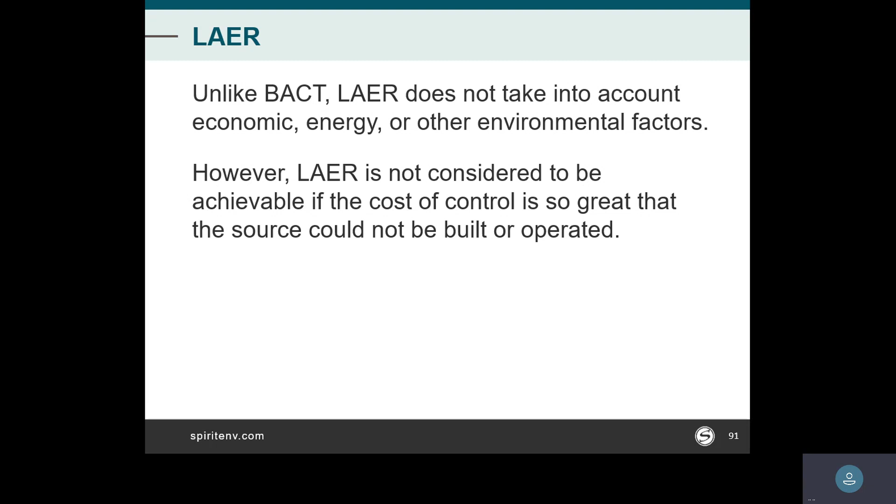And the reason they say that is because of this. If there's another operation in the same industry or a comparable industry that actually has put on that very stringent level of control, that is evidence and a demonstration that it is not cost prohibitive because somebody somewhere managed to put that level of control on and they're staying viable and they're in business.

And the reason the EPA did that, and they're sharp on some of this stuff believe it or not, when it comes to economics, what may be uneconomic for you may not be uneconomic for somebody else. And they can put it on where you may decide that's too much for me, that's too much for my company. And what the EPA would probably tell you, and what state programs would probably tell you, well, then you either need to find a way to put that control on because your peers have done it and it works. Or maybe you need to consider building your facility in an area that is not a non-attainment area.

And so it is stringent and onerous by design because you're trying to build in an area that already has quote unquote unhealthy air, which is what the NAAQS is designed to protect against. And so it's a very limited case. But if you happen to fall in that limited case, it can be a very challenging and expensive undertaking to apply LAER.

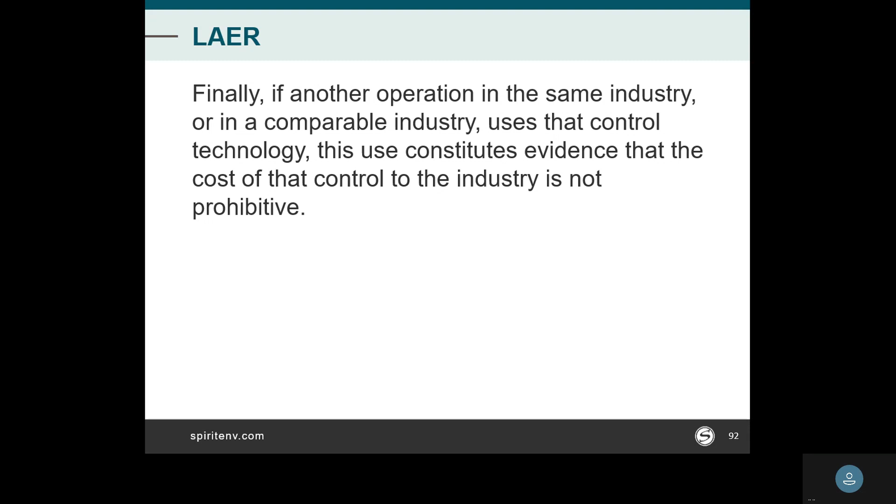And it can be done. It happens, I'm going to say all the time. It's not rare. Companies do go through non-attainment review and they do go through this kind of thing. So it's not this impossible hurdle that you can never get over. But it is intentionally high because you're trying to protect the environment.

And so much like Michelle was talking about for BACT, there's very similar type things for LAER as far as the fundamental base of how do you determine what LAER is, how do you know what it is, so you can make a demonstration to your regulatory program that this is in effect the most stringent of the stringent and should be accepted. And so first what they're going to do is look at recent control technologies in your state. They're going to look at recently approved control technologies in other states. They want to make sure you're not operating in a silo.

Sometimes companies will expand into other territories as well. We had a scenario come up not too long ago where a company was doing an innovative control that worked in Puerto Rico. So don't internalize states as just the 50 states - it applies to all American controlled territories too. Puerto Rico is the most common, and every now and then you'll get a hit out of the Virgin Islands, but that's really where it comes from.

They'll also go back and look at control technologies contained in the RACT/BACT/LAER Clearinghouse, or RBLC. That's really the first place people probably go - they'll do an RBLC search. Then they'll go to the state they're in and search as much as they can electronically, or potentially go to the file room and ask to see permits of a certain type for a certain industry class issued within the last 5 years. Then it becomes data mining, but it's a necessary evil for some of these things.

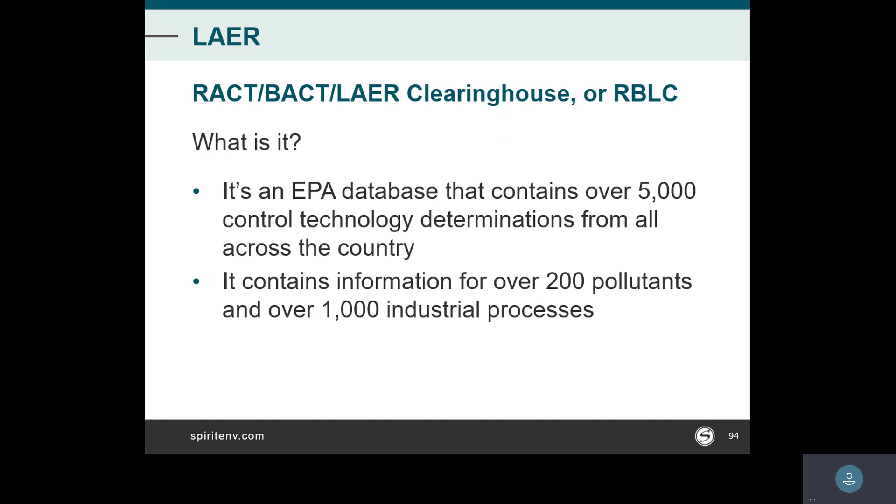These are searchable - it's on the EPA's website, the Technology Transfer Network Clean Air Technology Center. If you look for that, TTN or Clean Air Technology Center, that should take you to it. It's searchable in a variety of different ways. The 3 most common: you can look by facility type - so I'm a reactor, or a flare, or a polyethylene unit. Process data - you can put in that you're over so many million pounds of product, or so many thousand barrels a day. And then by pollutant data, you can put in a general search and say I want to see everything anybody's ever done for NOx.

What most companies do is run a search routine using all 3 parameters, then cross-compare to isolate the most stringent one. That's what actually sets the floor. If you want to build in a non-attainment area and you trigger non-attainment review, that's the value you're going to be expected to meet. By definition, it's intended to be stringent.

So that's kind of what LAER is - it's the best of the best as far as controls that's out there. Like BACT, it slowly advances, probably not as fast, but it does advance. So anytime somebody triggers non-attainment, they'll go back and do an RBLC search just to double check.

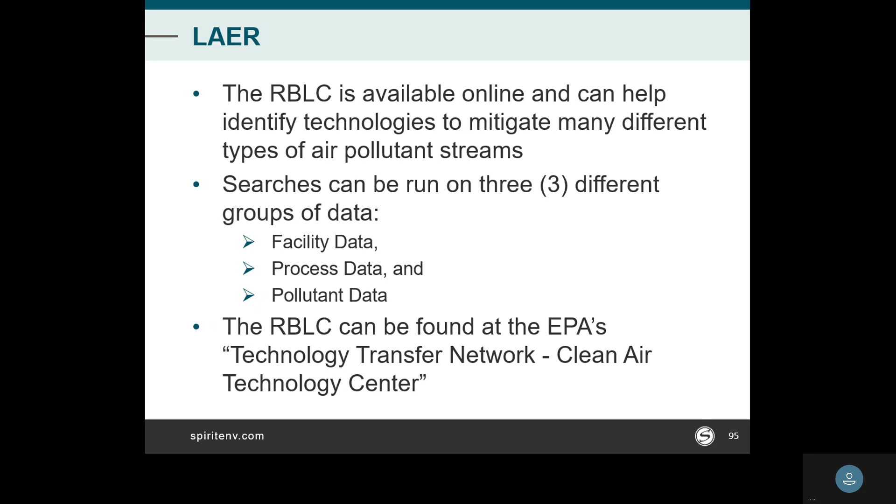Although either one of them. What time is your break? Ready?

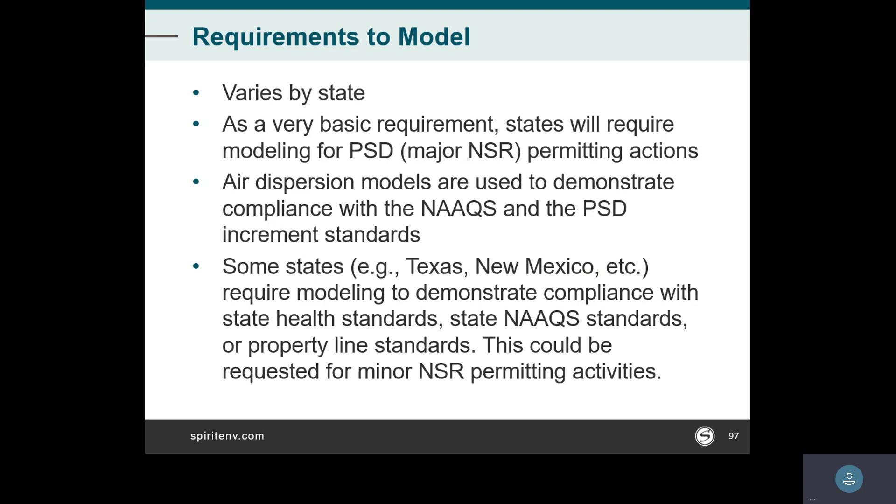So you've been requested to do modeling. What do you need? A lot.

Source input data - where are your sources? What are your emission rates? Stack height, stack diameter, temperature, exit velocity, and fugitive sources. Fugitive sources can actually cause more problems than point sources.

Your site location and property line can be very critical. If you've got sources that are very close to a property line, that causes major issues on occasion, especially if you've got critical receptors like residential areas, daycares, schools, that sort of thing nearby. Sometimes looking at doing a combined property line with an adjacent facility is a good idea.

Building structure, dimension, and location data, and making sure that's accurate - you'd be surprised what 5 or 10 feet of difference can do with your modeling results. Meteorological data - sometimes this is provided by a state or regulatory agency, sometimes you have to ferret this out yourself or have your modeler do that. And elevation data.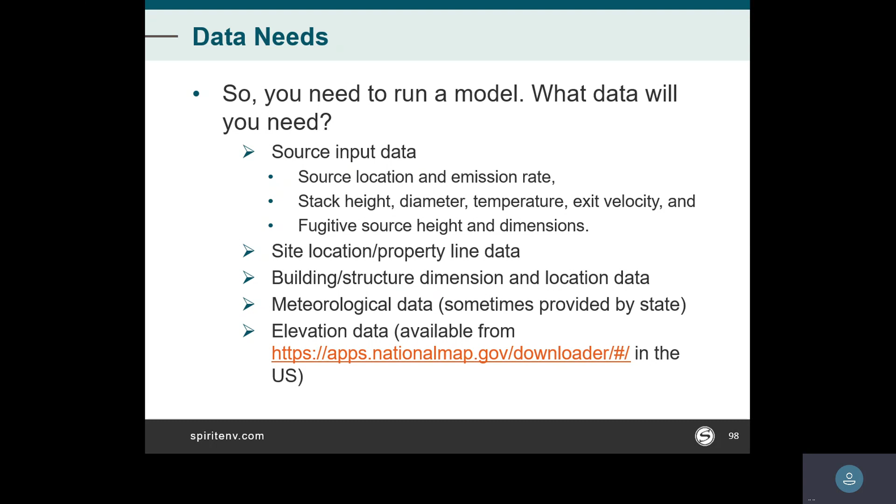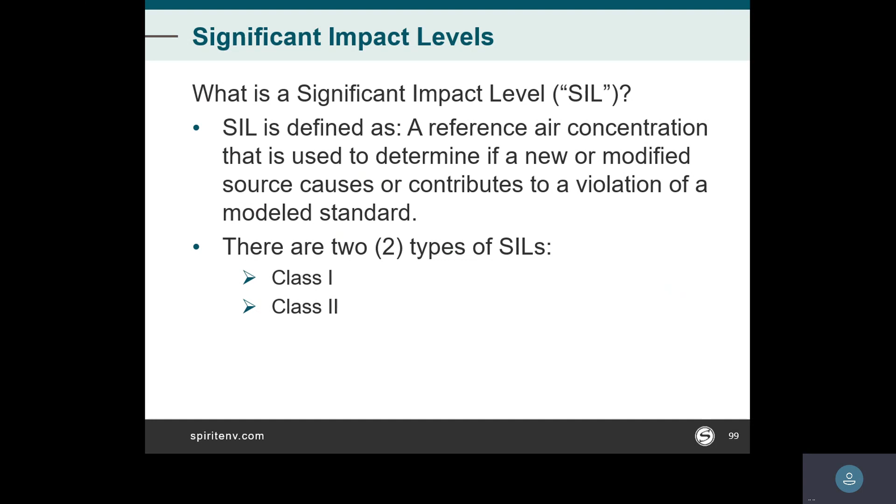And there are two types of SILs - a class 1 and a class 2. SILs are used as screening thresholds in modeling. We're looking at NAAQS and increment levels, to determine if your project requires additional site-wide modeling.

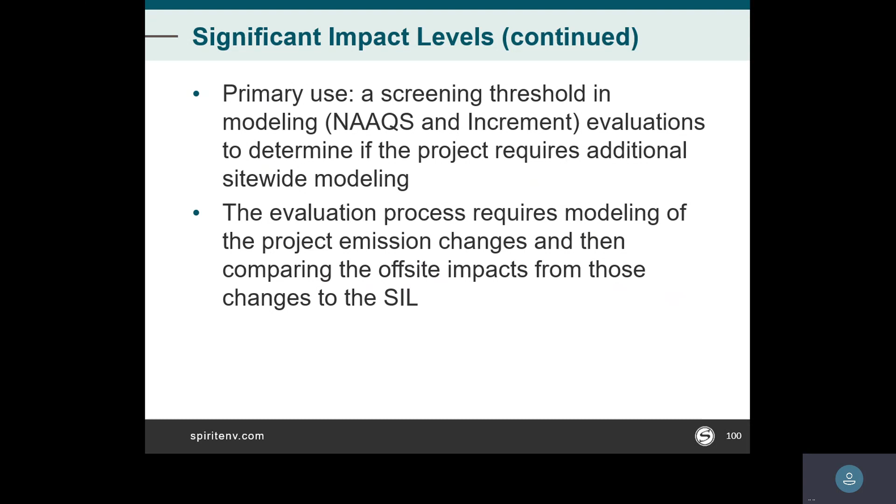So this is the gatekeeper. We're looking at modeling project emission changes and comparing offsite impacts and the changes to the SIL. If your impacts are below the SIL, you're done. You don't need to do anything else.

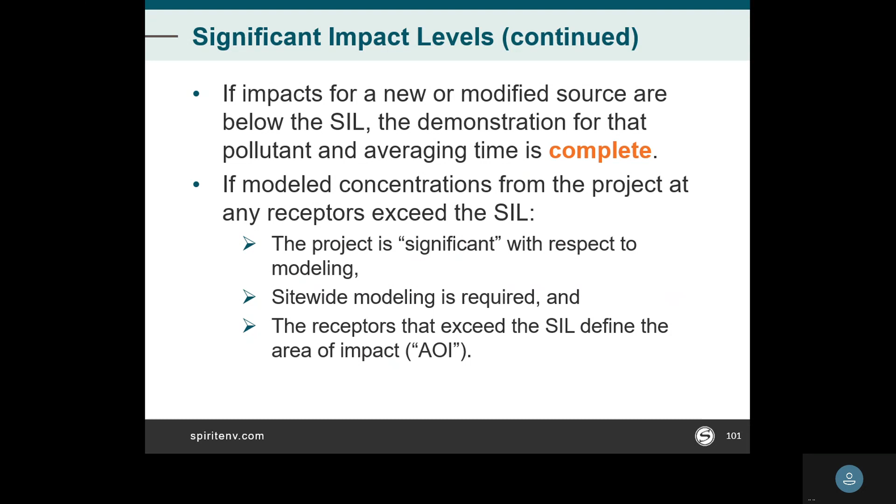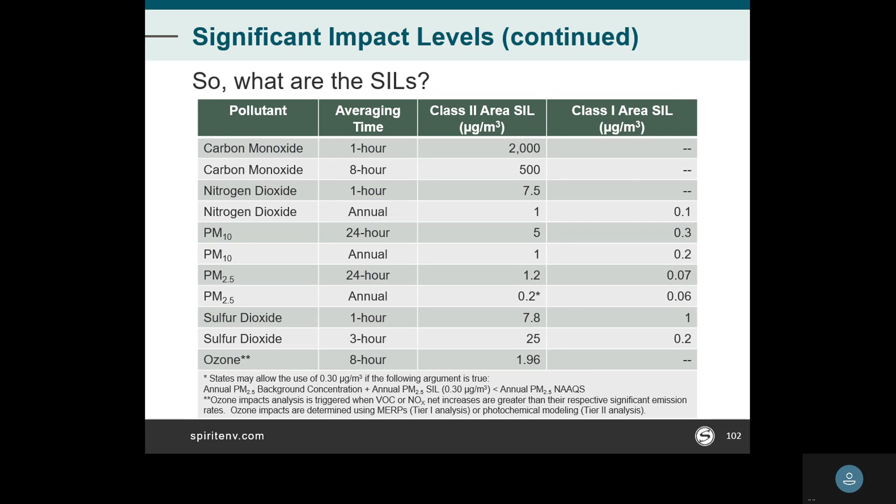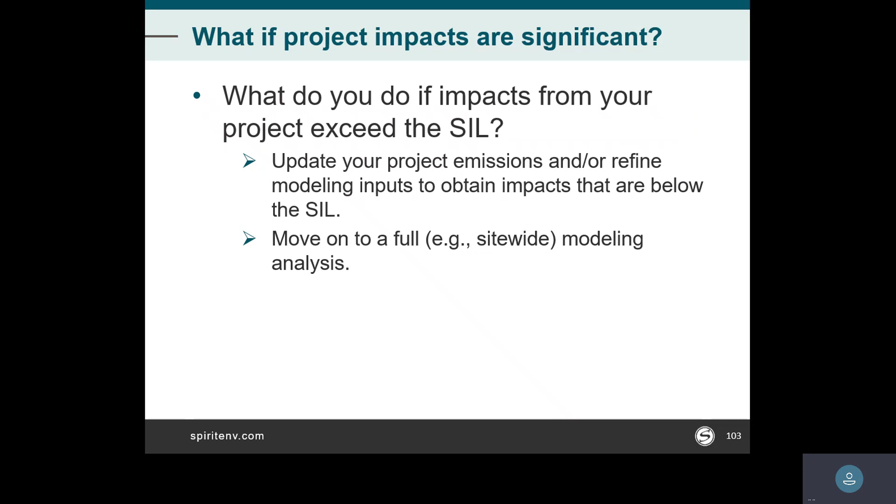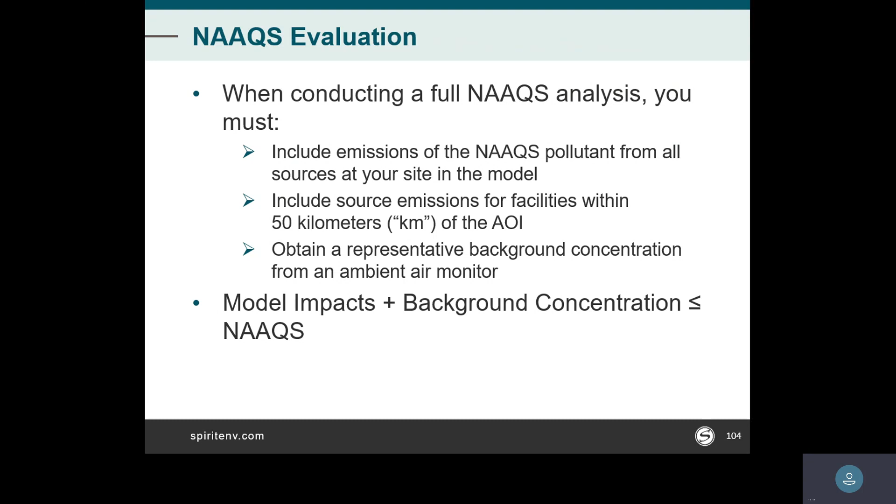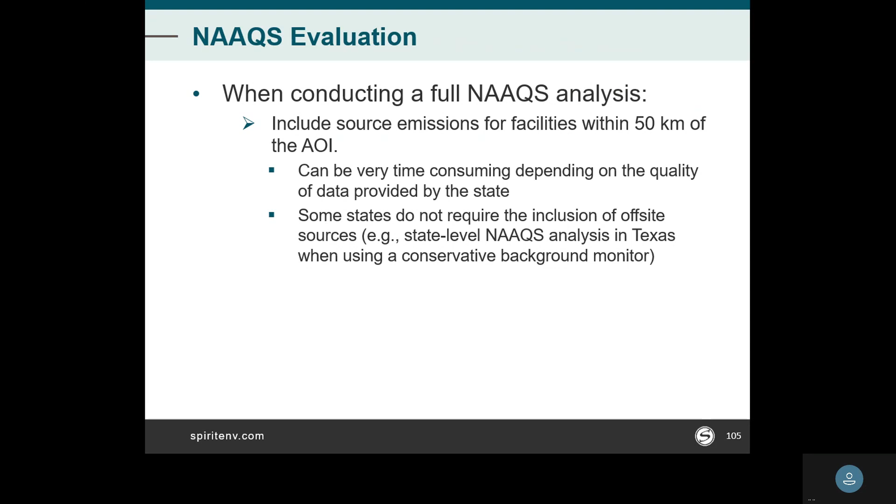Representative monitoring sites for ambient air monitors could be your very own monitor. When we were talking about the consent decrees earlier that Johnny mentioned, some facilities as part of consent decrees have installed on-site monitors at their facility, or you might have a neighbor that has an ambient air quality monitor. You can get data from those.

You can use an ambient monitor in an area that is similar to the site within reason. Typically, if you go more than about 200 to 300 kilometers-ish from your site, that can be frowned upon unless you can prove that the facilities in the area you're using are very pollutant-similar to your operations. If you're in an area where the pollutants emitted are a lot of VOCs, and you're comparing it to an area with a lot of NOx and CO, that will not pass muster. The terminology they use is it has to be representative. Kind of nebulous, I know, but they're trying to find something that is as close to you as they can possibly get.

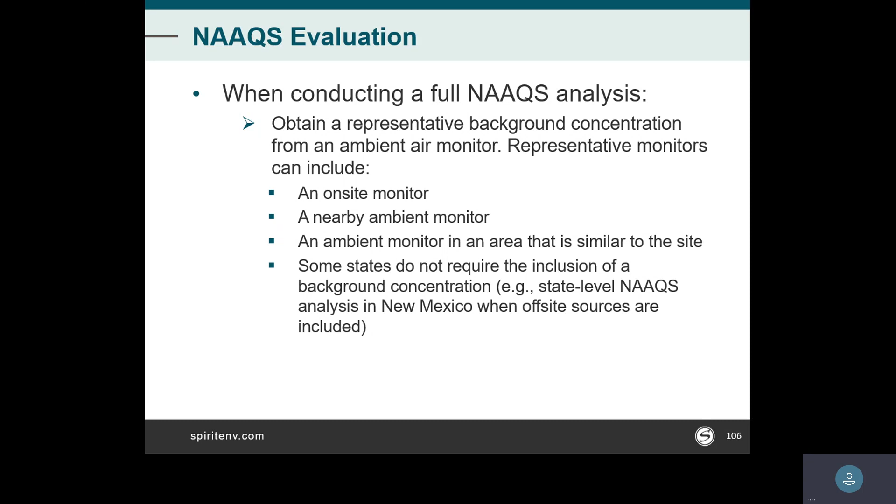You will be requested in most cases to do a NAAQS evaluation for ozone and PM 2.5 unless you're not emitting PM 2.5 sources at all. But at least for the chemical and refining industry, you're probably going to be emitting some VOCs that are ozone precursors and some PM emissions. Things to consider: ozone and PM 2.5 may not be directly emitted from your sources, but might be generated from primary emissions of other pollutants. And you have to quantify the impacts from that secondary formation.

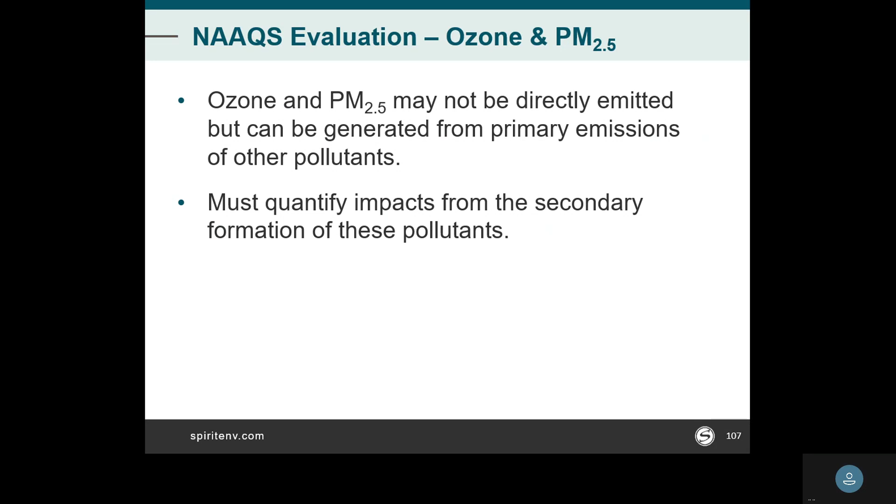So what do you do if your proposed project exceeds the NAAQS? This does happen a bit, actually, especially in Texas. This is more out of going back to policy memos - you won't find this really in a guidance document. You can use a ratioing approach they refer to as the ambient ratio method 2, or ARM2, approach. It uses an EPA equation to basically ratio down your NOx impacts. Because even though people talk about NOx as being what's under evaluation, the National Ambient Air Quality Standard is actually NO2. And you have NO, and other kind of byproduct cats and dogs. So it's a way of taking your total NOx and figuring out how much of it is actually the target pollutant and adjusting it.

Using the tier 3 approach, this one relies more on input of in-stack NO2 to NOx ratios, and also looks at the background ozone concentration data. A little bit more convoluted approach, and can be somewhat time consuming.